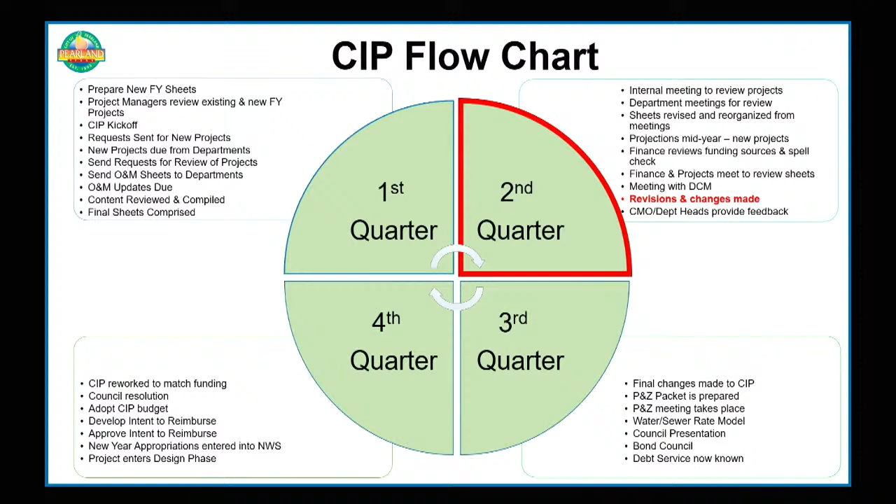The creation of the 5-year CIP is an in-depth year-long process involving every department within the city. The 2024 through 2028 CIP was finalized September 11, 2023, and the planning process for the FY25 CIP was initiated in October of 2023. We're currently in the second quarter of the CIP process, and staff is reviewing and finalizing project scopes and verifying funding options prior to presenting the proposed CIP to the Planning and Zoning Commission and ultimately to council for consideration and adoption.

In June, the CIP workshop related to the proposed FY25 budget will take place, and the CIP update series will resume in October of 2024 with updates to parks and facilities related projects.

At this time, I'll turn the presentation over to Raj Shrestha, the city engineer, for more detailed updates on drainage related projects. Thank you, Lorenzo, and good afternoon, Mayor and Council. Thank you for the opportunity to provide an update about the drainage series. The drainage section will be broken into 3 distinct categories. I will cover the first section, which will focus on drainage history, guidelines, policies, and major projects. The second part will consist of CIP drainage project status update by Lorenzo, and the third and final one will be about drainage maintenance. Eric will update the council about the status of operations and maintenance and the path forward.

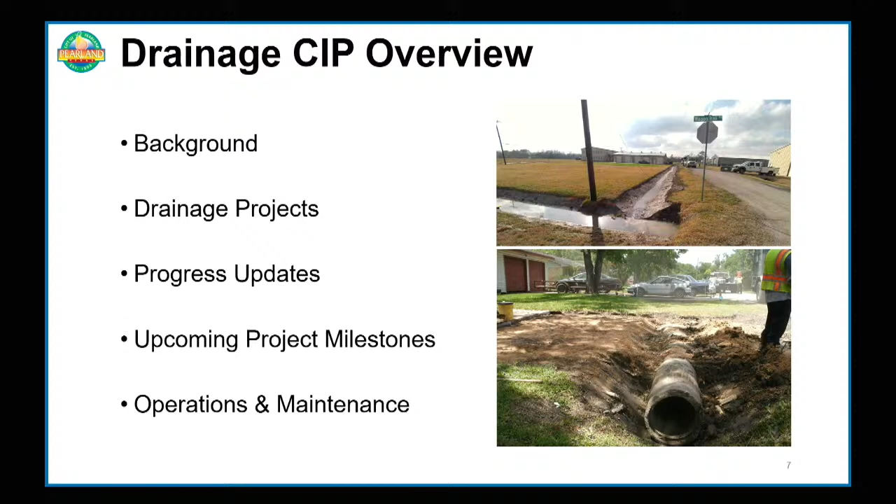Here, I'm going to talk about the history of our drainage project. As you can see, the Storm Drainage Improvement Ordinance was adopted in 1983 with no detention requirement. As time progressed, the drainage guideline evolved to add detention requirement, no downstream impact requirement, and minimum detention requirements. The most recent update requires the finished floor elevation of buildings to be higher between 500-year floodplain elevation or 1 foot above 100-year floodplain elevation, which is consistent with Harris County requirement.

On the right side, we can see the evolution of the city's Community Rating System class, called CRS. CRS is a voluntary incentive program that recognizes and encourages community floodplain management activities. As you can see in the table, in October 2024 the city will be CRS Class 5, evolving from Class 8 to Class 5 between 2005 and 2024. This CRS class improvement will make the community eligible for NFIP discount from 20% to 25%. Awesome job by engineering, and I must mention the name Shasha Bakhai, who worked diligently to improve our CRS class.

Similarly, the third table shows the history of the hazard mitigation plan. The hazard mitigation plan identifies potential hazards, assesses risk, and outlines mitigation actions to reduce property damage, injuries, and loss of life. The federal government requires it to be updated every 5 years and adopted by the City Council. An adopted HMP is a must for federal grant applications such as GLO or Texas Water Development Board or any other grant programs.

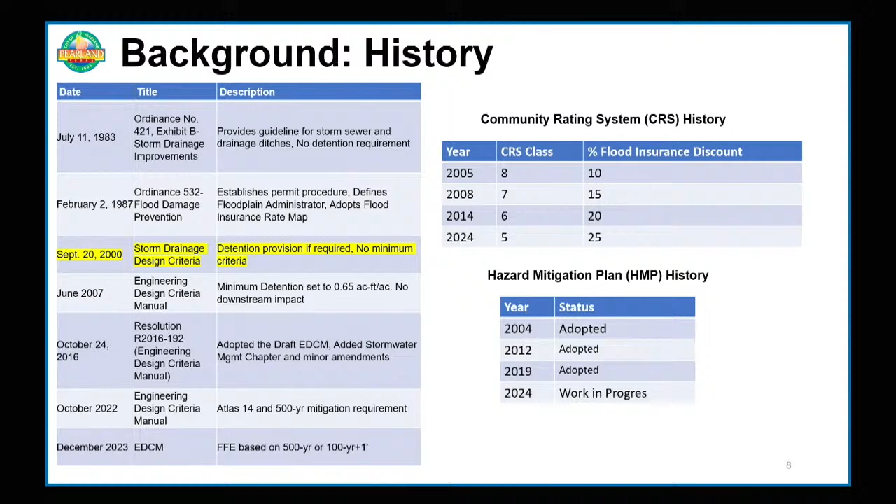Master Drainage Plan and FEMA update: Texas Water Development Board has recently awarded the FEMA FIRM update project to Halff Associates. This will update the FEMA FIRM for the Clear Creek watershed using the MAAPnext modeling concept, similar to what was used by Harris County Flood Control District.

Based on the latest communication with Halff Associates, the first draft of the hydraulic and hydrologic model will be ready by spring of 2025. We will wait for Halff Associates to finalize the calibration and validation of the H&H model, and then we can start our master drainage plan update. Halff prepared our 2019 MDP and will be updating the FEMA FIRM for Texas Water Development Board, so we are thinking we'll bring them back on board for the MDP update in 2025.

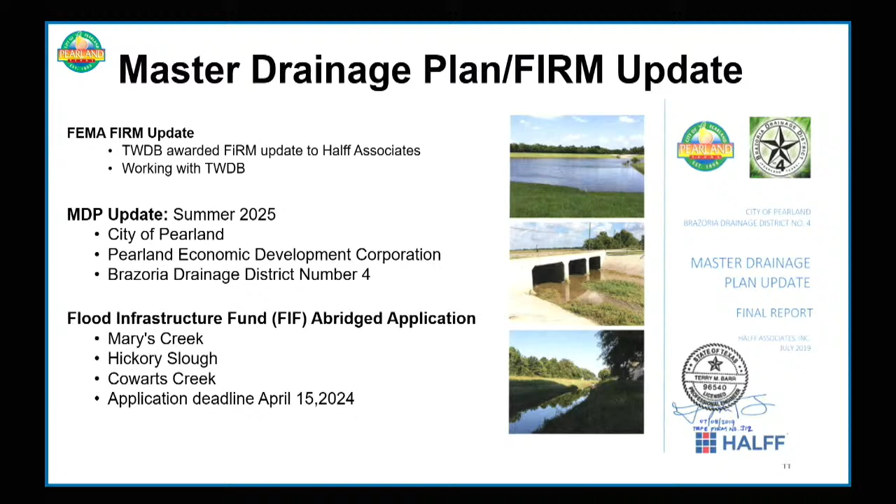The city is a member of the Clear Creek Watershed Steering Committee. The committee meets on a bi-monthly basis, in which Harris County Flood Control District provides a status update about various projects that they are involved in within the Clear Creek drainage area. This update is based on the February 13, 2024 meeting.

The major highlight includes the conditional approval by USACE in November 2023. Another highlight is the community engagement virtual meeting, scheduled for March 27, 2024 from 6:30 to 8 p.m., which I will be attending. As far as the project completion date, it is still 2032, with no change as of today.

Now I will turn it over to our director, Mr. Lorenzo Wingate.

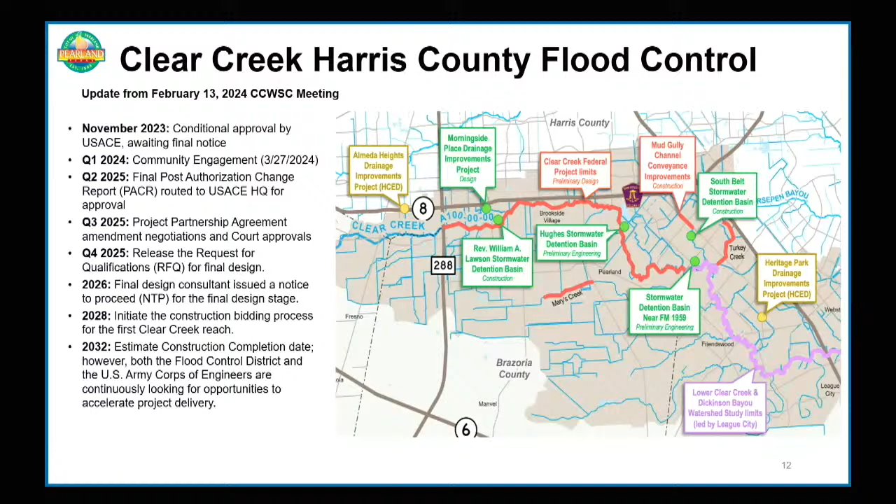In 2022, approximately 24 preliminary engineering reports were prepared for the engineering and capital improvements team to evaluate potential drainage projects around the city. The recommendations from those PERs were shared with the city's bond committee, made up of community members as well as elected officials, which led to the inclusion of most of those projects within the 2023 voter-approved bond.

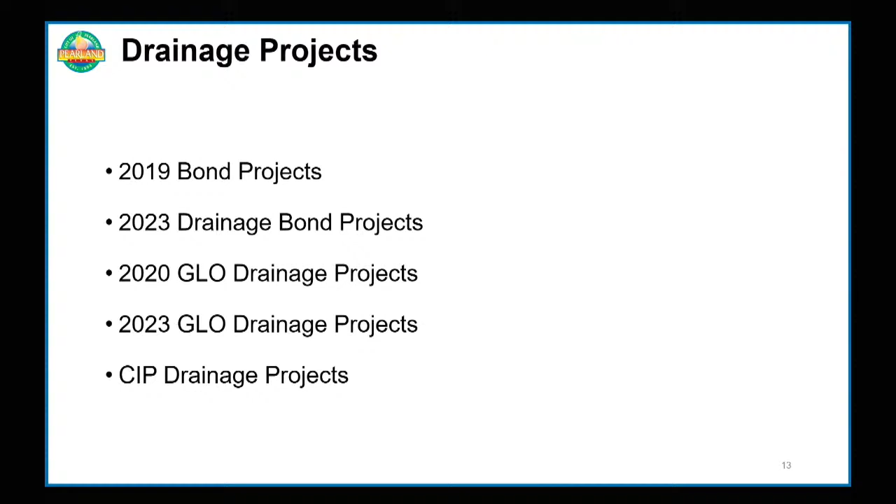The grants division also supported project budgets by securing grant funding through the General Land Office via the Community Development Block Grant Program, also known as CDBG funding.

Shown here are 14 drainage projects that were included in the 2023 bond election and their scheduled release dates. The release dates were based on project prioritization through a scoring matrix developed by the engineering division and reviewed by the bonding commission. Staff is currently negotiating professional services contracts for all 5 projects scheduled to begin in FY24, and these project scopes will include rehabilitation of existing pavement where asphalt pavement materials are within the project areas.

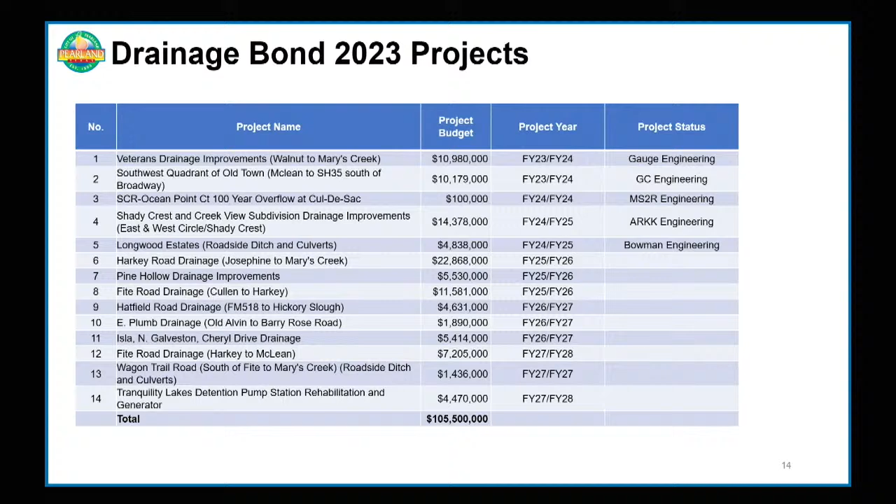There are 3 drainage projects funded through the General Land Office, or GLO, in an approximate amount of $2.3 million. These projects, noted within the Harvey Drainage Assessment Report, will improve conveyance in the area and help reduce flooding.

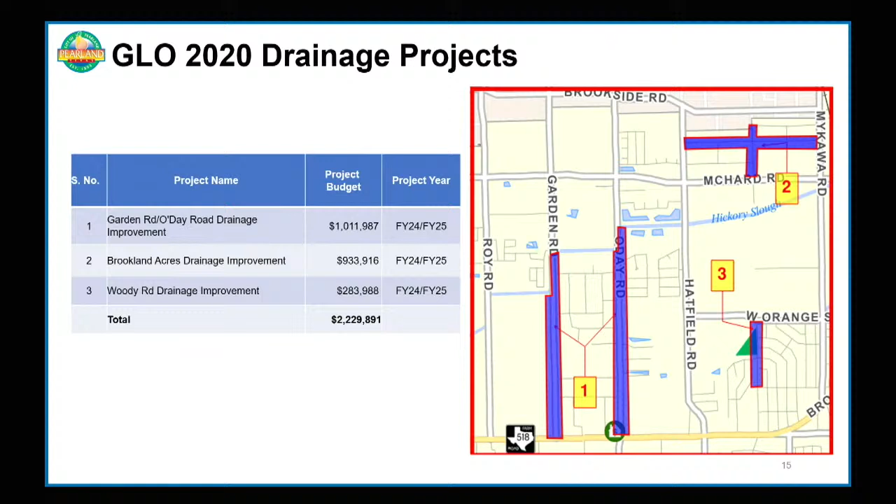Projects 1 and 2 on this list were originally considered to be included as part of the 2023 bond program. These projects will improve conveyance to mitigate flooding, and the embankment project will repair a failing embankment along Hickory Slough. Staff realized the project's location within a low to moderate income area and was able to secure Community Development Block Grant, or CDBG, funding from the General Land Office for design and construction.

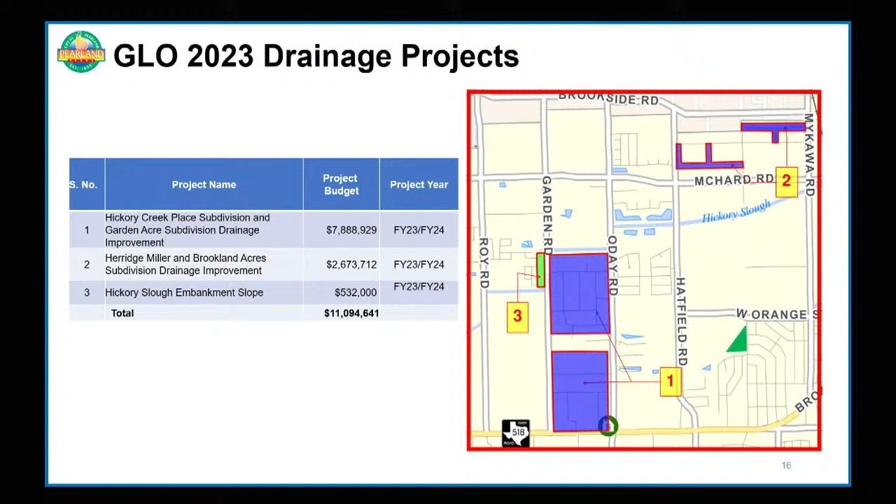These projects are combined into a single design effort and are intended to be solicited for construction as a single project.

The Hickory Slough Regional Detention Pond was constructed in coordination with BDD4. Once the McHard Road Extension Project receives final acceptance, the remaining pond improvements will be completed.

The Hickory Slough Sportsplex Detention Pond Project, which is phase 2 of that detention improvement, will be the final build out for the Hickory Slough Pond and will add 95 acre-feet of detention at the Sportsplex. It will finish out the build out of the stormwater pump station and include final pumps and a standby generator to power the lift station site in the event of power loss.

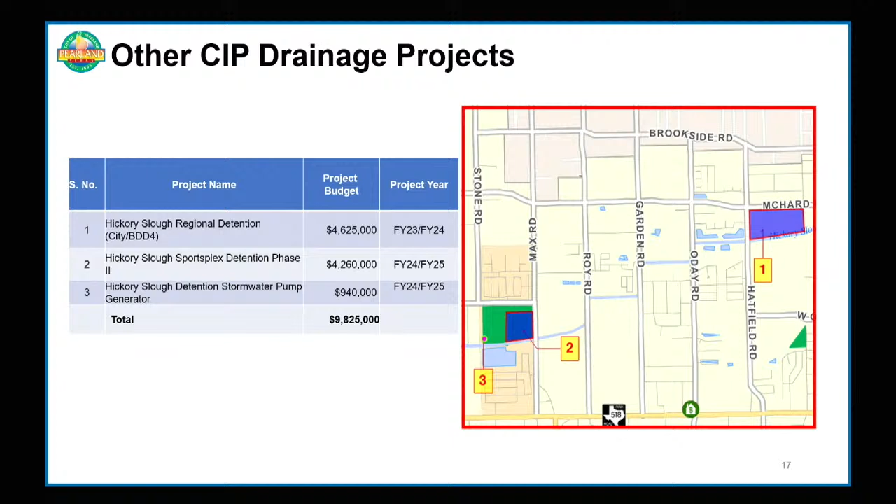The project is being designed collaboratively with the Hickory Slough Sportsplex improvements, and both projects are intended to be solicited for construction as one package.

Here's a summary of the current CIP schedule for 24 through 28, which was presented to Planning and Zoning and approved by Council on September 11, 2023, for an anticipated 5-year total of $124.5 million.

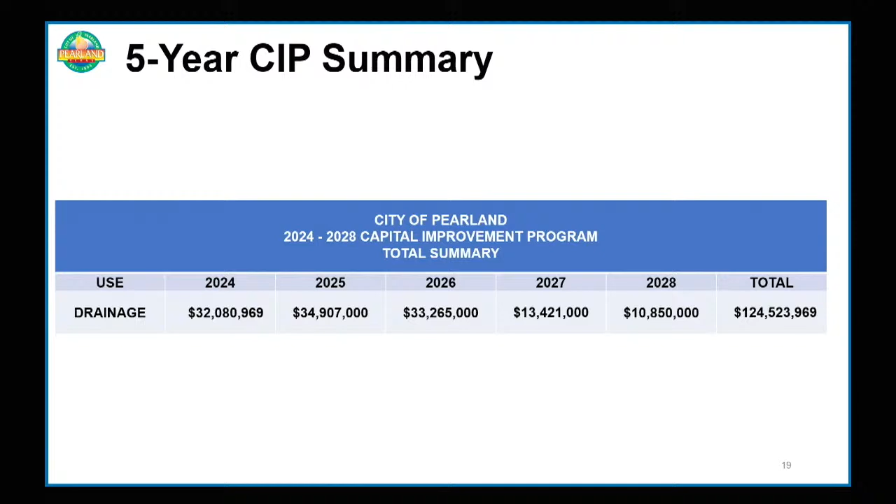At this time, I'll turn the presentation over to Eric Hammond, Assistant Director of Public Works, for more detailed updates on drainage operations. Good afternoon, Mayor and Council, thank you for the opportunity to expand on our previous operational update and touch on some of the advancements from our drainage program since we last spoke last year.

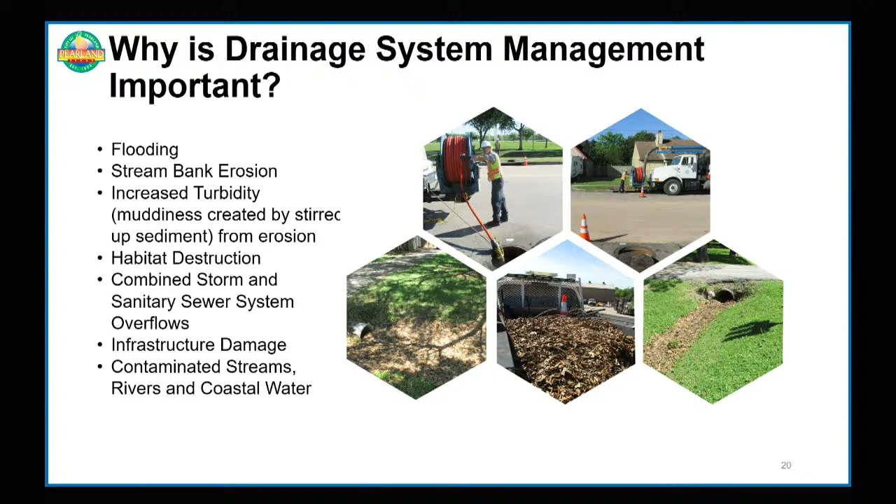As a quick reminder of why drainage maintenance is important and why we provide these services: impacted storm sewers can lead to downstream flooding, property damage, habitat loss, sanitary sewer overflows, contamination, and erosion, just to name a few. Through routine and targeted maintenance activities, coupled with our capital improvement project team, we believe we can reduce impacts of flooding within our community.

What really got us to today's drainage program: on March 2nd, 2022, while draining an elevated storage tank at City Hall for maintenance, staff observed large amounts of water ponding around the tank, not draining into our adjacent storm sewer. Upon inspection, staff found a large root obstruction impacting that sewer's ability to perform, and upon removal, the surrounding area performed as designed, reducing the potential for flooding right here in our own backyard.

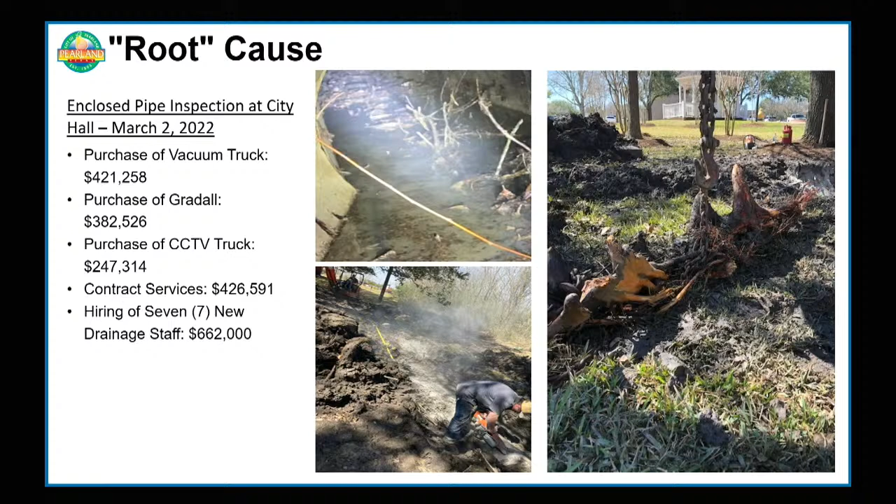That root remains in our office and serves as a reminder of what can happen should we continue to neglect drainage activities and operate on a solely reactionary-based approach.

To highlight the magnitude of the drainage system, we offer this glimpse of the 346 miles of enclosed drainage system that spans our entire community. That length of pipe would stop just short of Abilene, Texas, if we connected it end over end today.

Keep in mind there's an additional 141 miles of open ditch not represented in this image, which typically run parallel to our asphalt streets, and just under 7 miles of hybrid system consisting of an enclosed system constructed underneath a shallow swale. We also have just over 13,500 inlets that collect stormwater before it's transported to receiving streams. This inventory increases daily as development continues.

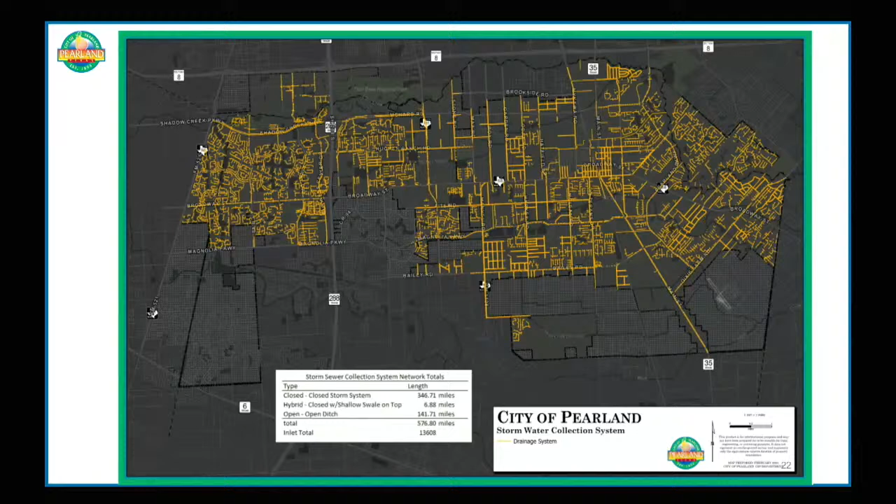In addition to the assets just highlighted, the city has an additional 110 buyout lots acquired due to past flood events, and over 300 detention facilities comprised of both private and public ownership. With the dedicated drainage team, engineering colleagues, and key stakeholders, the city is focused on a 10-year maintenance program, providing grounds maintenance services to 757 acres of drainage or buyout property, and providing all emergency response support activities related to drainage system management.

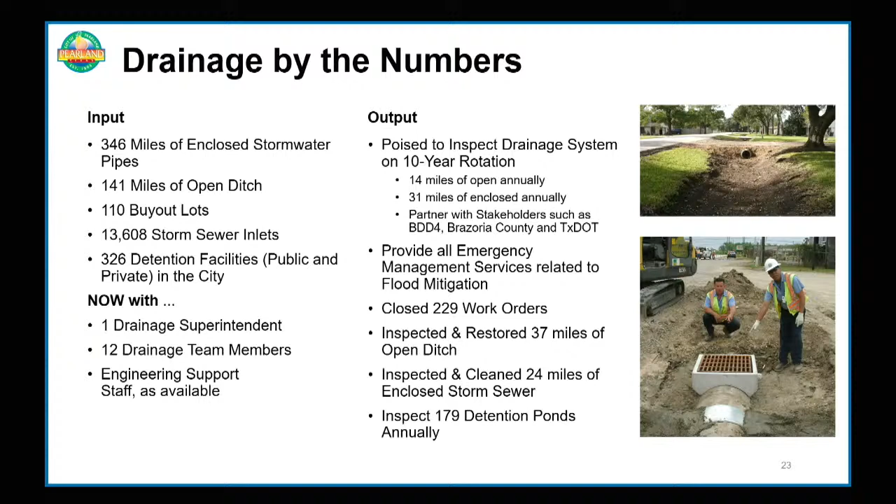Prior to FY23, we merged our right-of-way, streets, and drainage services within a single division. This merge initiated a complete streets approach to right-of-way management, and 33 employees were assigned to provide all facets of maintenance, ranging from street repair, drainage maintenance, sidewalk management, grounds maintenance, utility locates, right-of-way permitting, pavement marking, and hotshot services. However, in total, only 6 of those employees, inclusive of the service supervisor, were assigned to drainage-specific roles.

Due to reduced staffing levels, drainage and street maintenance personnel were routinely shared between services to ensure adequate staffing and response. However, in response to a desire to support drainage activities, Council supported a recommendation to increase staffing levels and critical equipment vital in providing these services.

The personnel component of that support included the phased onboarding of 7 additional drainage team members, bringing our new staff total to 13, who focus solely on the management of stormwater and stormwater infrastructure. These personnel, coupled with equipment such as Gradall, combination cleaner, and CCTV or closed circuit television truck, paved the way for the city to begin a systematic approach to drainage system management and maintenance.

As a result of the program-based approach and desire to advance systematically through the community, staff purposed to inspect, clean, and reestablish flow lines as necessary on a 10-year basis. Year one commenced in Zone A, just south of Broadway and west of Main Street. The team is now in Zone B, which mainly encompasses the area south of Magnolia and north of Bailey. Staff intend to continue advancing counterclockwise from this zone throughout the remainder of the community.

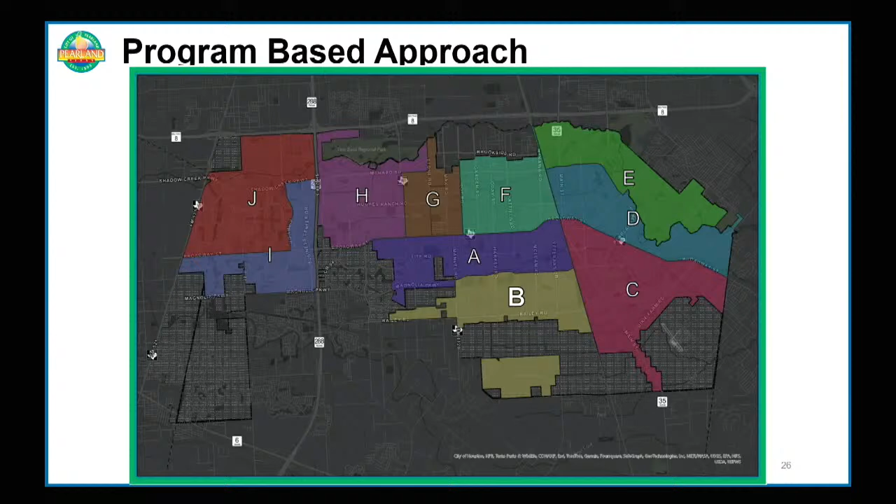To illustrate a few of the successes associated with the program thus far, the team identified and addressed the following deficiencies. The first is an enclosed storm sewer in the Woodcreek subdivision. This is an aged system and a recurring location for future CIP discussions. These photos capture a major joint separation near the outfall into Clear Creek.

A significant separation has the ability to impact the flow of water and cause backups that can lead to street and property flooding. Several feet of pipe were replaced and the outfall reconstructed. Due to the major reconstruction activities associated with this repair, this item serves as an example of the city's need to continue leveraging contractual services to supplement in-house activities.

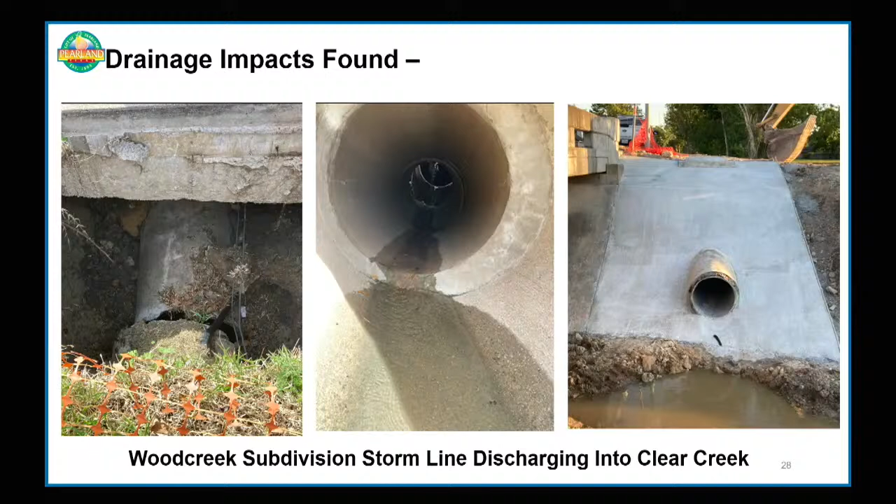Another critical deficiency identified and improved is a detention facility on Magnolia, just west of Main Street. Years of silt buildup and vegetation choked the facility's ability to receive, store, and discharge stormwater. After extensive cleaning, the pilot channels and outfalls are now free and clear of debris, which allows the water to move as designed. Not only did the silt cause maintenance challenges such as grounds maintenance activities or mowing, but it also increased the potential for pests such as mosquitoes within our community.

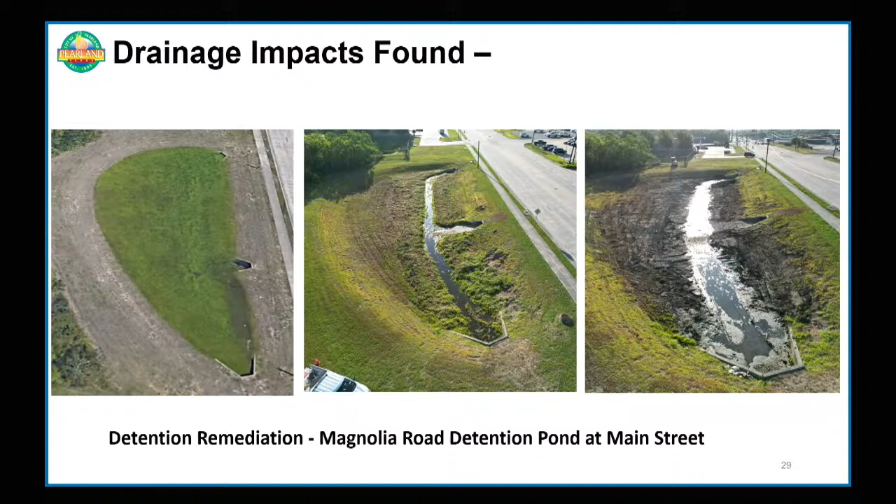As we touched on briefly, the city leverages contractual services to augment in-house staff capabilities. At an April council meeting, staff intend to renew a drainage maintenance contract with Texas Drainage to support open ditch grading activities and help ensure continued adherence with the 10-year rotation. It is also the intention of staff to present in the coming months an enclosed storm sewer contract with National Works for outsourced cleaning and inspection of the enclosed system.

The team recently conducted a pilot project with National Works for contractual cleaning and found the tandem approach to be vital in meeting service level expectations.

Contractual services aid in supplementing performance impacts caused by intermittent staffing challenges, weather delays, priority conflicts such as non-program work requests, and resource capabilities. For example, the outsourced services for open ditch cleaning employ a customized cutting head that allows for longer reach and linear pulls for ditches that may be at a greater distance from the road, and also allows turf access with this equipment because of the tracks.

So it allows them to get just off the roadway, where current city equipment is wheeled and we must remain on pavement to conduct our drainage operations. Both of these contracts were forecasted and budgeted for in the division's budget.

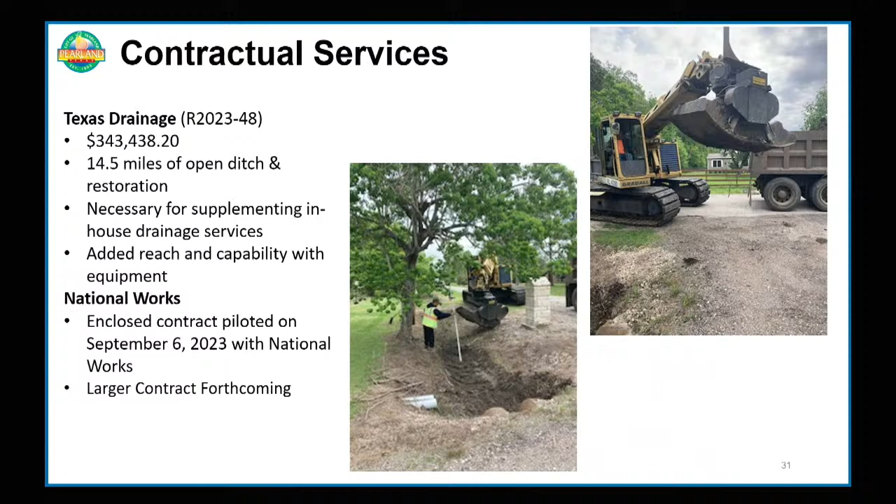As we begin to close out, we offer this glimpse of the team's current completion of drainage services within the community. Keep in mind that while we operate from a program-based approach, we concurrently manage work orders that are submitted and at times may be outside of the program zone, but addressed as prioritization requires.

To track progress, the team, in conjunction with our GIS department, developed a dashboard that provides a real-time snapshot of improvements as they are completed. This dashboard is driven from CityWorks, the department's work order management system, and as staff close out work orders, the asset status is updated in real time, providing an up-to-date view of activities throughout the community.

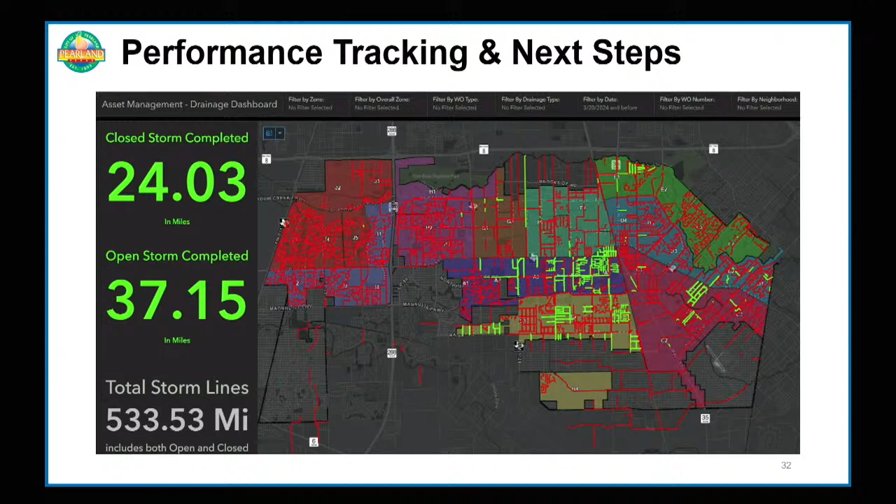Since program commencement, the team has inspected or cleaned over 24 miles of enclosed system and 37 miles of open ditches. Based on the original forecast of a 10-year plan, we're beyond the target for open drainage at 127% completion, and on track to meet our goal for enclosed system maintenance at 52% completed so far this year.

Finally, I'd like to share that in the name of ongoing improvements, the team has made a large organizational shift. As Mr. Epperson alluded to several meetings ago, staff intended to make necessary adjustments within the right-of-way division to create capacity for the division superintendent, who has managed all facets of street, sidewalk, right-of-way, and drainage maintenance activities.

That shift has occurred and provided for the development of a standalone drainage division, now led by our very own Malcolm Kennedy. Malcolm has served as the drainage supervisor for several years and was the tip of the spear in the drainage program development, as well as its ongoing success.

Malcolm is a graduate of Texas A&M University and a certified floodplain manager. Between the team and himself, we're excited for the future of the drainage program.

Most recently, the team published a YouTube video available on the city's webpage, updating the community on the drainage maintenance program, and developed a public-facing dashboard available on the city's drainage website to keep the community aware of crew locations and progress.

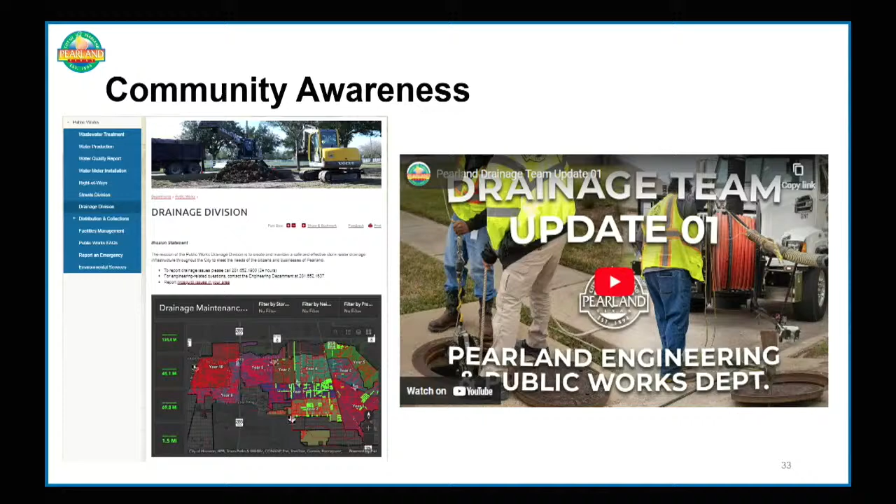So that concludes our presentation on the drainage portion of tonight's schedule. If there's any questions or comments on the drainage portion, we'd be happy to entertain those at this point. All right, we'll open up for any questions that someone might have.

Jimmy? So in the drainage package that we put together, I saw the list and everything, and I'm looking forward to those. But in those meetings of the drainage bond committee, you guys had a 2D model that showed if it started raining and kept raining, which areas would flood first. I'm not sure all of us have seen that. I have, but I would love to actually see that again. So I don't know if you guys can email that out or present it to us in some form or fashion.

And then my question on that also is, on that 2D model, is there a way, with the improvements that we're going to make with the bond package, to adjust that 2D model to show the actual impact that we are making on the drainage of the city?

Thank you for the question. I'm not sure which one was discussed during that meeting. I remember one for the Longwood area where we did that project, and that was a 2D model.

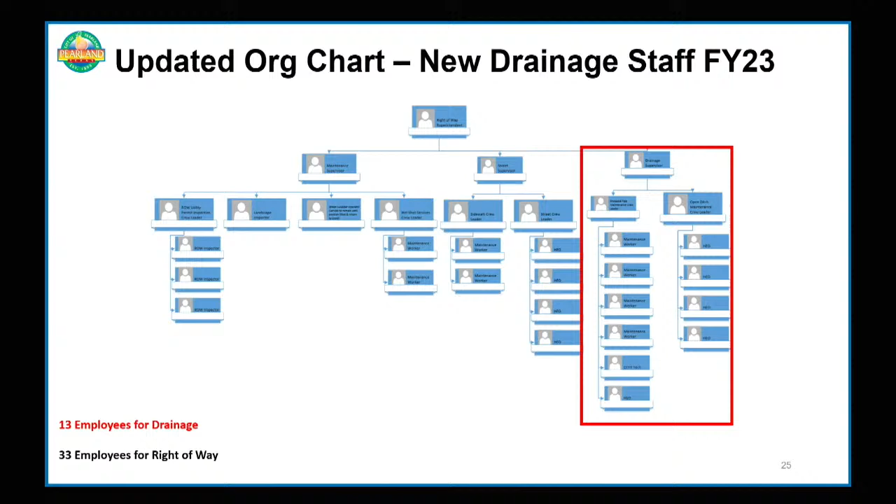Yes sir, Mayor. We are working to collect that information, and very soon it'll be visible on our internal dashboard, where we have all of the data saved that shows all the conflicts, issues, or obstacles we've overcome, so that we can navigate through those or prevent them in the future. We are working on collecting those now, especially through the use of our CCTV equipment.

Perfect. I see that as a future talk of the town subject, where we educate the public on here's the program we stood up, here's what we're now seeing, here's some of the data we're collecting, here's what we're seeing in that storm pipe and the reason we're doing it, so when the storm comes, we're now ready for it in those areas. So thank you for that.

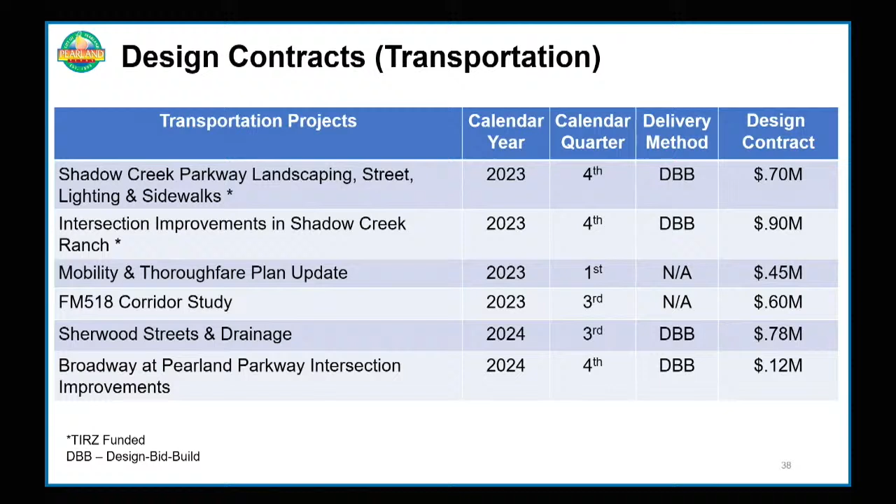Two major projects that were completed in 2023 include the Shadow Creek Ranch sidewalk extensions and the extension of McHard Road from Mykawa to Cullen. McHard Road, opening in April of 2023, provides another east-west corridor intended to lessen the traffic volumes on FM 518.

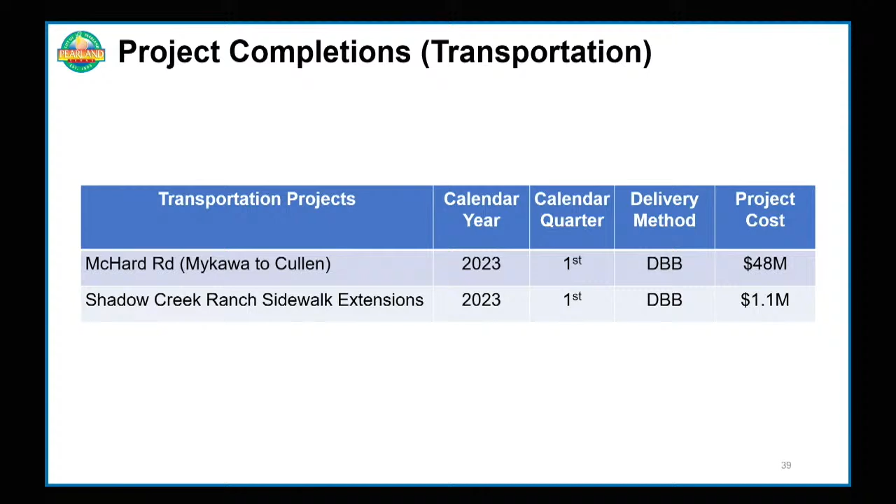The McHard Road project was awarded funding through TxDOT's Local Government Projects Procedures Qualification Program, also known as LGPP, which offers an 80-20 cost share split with TxDOT paying 80 and the city paying 20. The McHard Road extension will also be more important in the coming years as TxDOT progresses with the FM 518 expansion project. The west section of FM 518 expansion, from Old Chocolate Bayou to 288, is projected to begin construction in 2025.

The Safe Routes to School project is a federally funded project and provides safe access to local elementary schools.

The Bailey Road expansion is a 2019 bond project, currently in construction, which will provide 2 dedicated eastbound travel lanes between Highway 35 and Veterans. The project is expected to be completed by April 6th of 2026, or about 861 calendar days.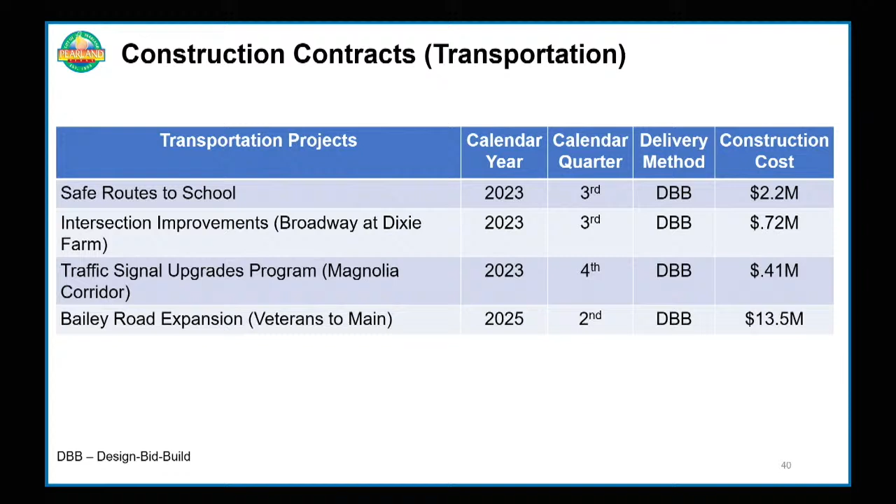Several traffic signal upgrade projects are being managed by the traffic division, currently ongoing to replace outdated equipment, including cabinets, detection systems, and pan and tilt cameras along Magnolia and 29 other intersections.

Projects that did not receive HGAC funding will be candidates for future bond programs. With that, I'll turn the presentation over to Yossi Ramirez, the city's traffic engineer, to provide a traffic operations update.

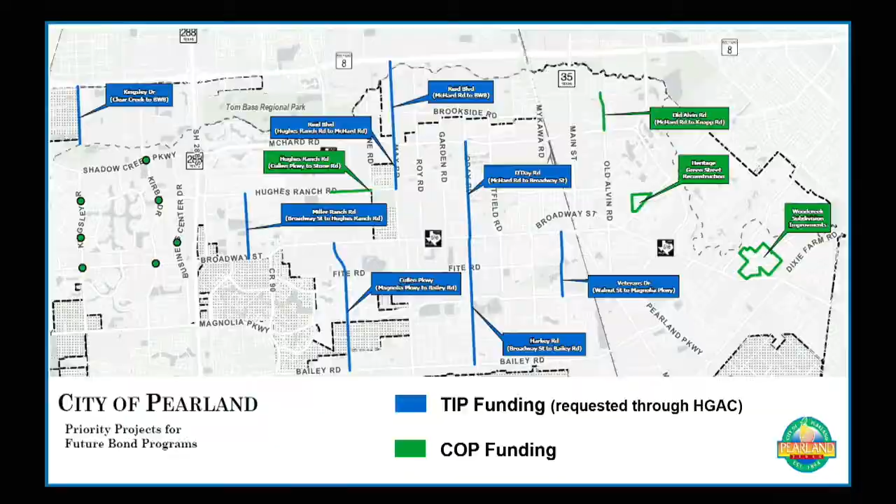The City of Pearland Traffic Operations oversees the city's transportation system, which includes traffic signals, school zones, communication system components, city facilities, and other elements of the city's infrastructure. The daily maintenance of traffic operations includes troubleshooting several internal components in the traffic signal cabinets, field hardware, and school zone flashers, as well as repairing damaged streetlights and converting them to LED fixtures.

We recently inherited the daily maintenance of street signs, which includes installing and repairing signs along the city streets. In addition to our daily maintenance, we have several internal projects.

Short-term projects include upgrading the school zone flashers program to new timers, which we can now program from our traffic management center. Another short-term project is the Opticom emergency vehicle preemption, which has allowed us to decrease response times and improve safety for emergency responders.

41 fire vehicles are now outfitted with Opticom equipment, and we are looking to add 15 police vehicles by the end of April as a trial for police. 82 intersections are connected to the preemption system, and the remaining 28 intersections are waiting for fiber connectivity.

For mid-term projects, this includes installing flashing yellow arrows at several intersections, overseeing the rebuild of 5 span wire intersections, and removing and replacing outdated traffic signal equipment such as traffic signal cabinets and detection systems.

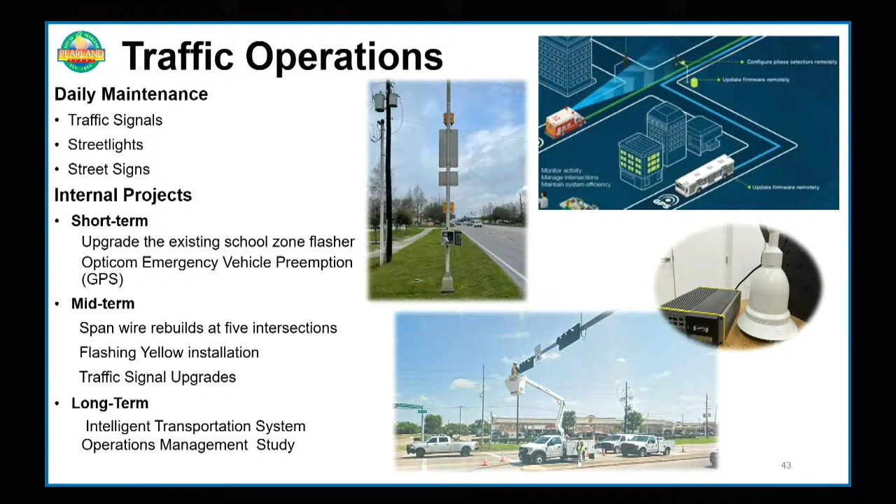We also have 3 projects in partnership with the Houston-Galveston Area Council. As you can see, we have the Pearland Transit Needs Assessment Plan, the Pearland Mobility Study, and the FM 518 Corridor Study. The Pearland Transit Needs Assessment Plan is 100% funded by HGAC.

The study aims to determine and assess the needs for public transportation or transit in the Pearland community, and to provide recommendations for what types of transit services, if any, may be appropriate for the community to consider in the future. Phase 2 of the public meetings occurred from March 19 to the 21st, and the final report is near completion. It is expected in late spring 2024.

The Pearland Mobility Study and the FM 518 Corridor Study are 90% funded by HGAC and 10% from the city. The Pearland Mobility Study is a 12-month study that will result in a mobility plan that includes an action plan, a traffic management plan, and an update to the Pearland Thoroughfare Plan. The study will also investigate safety, connectivity, network efficiency, and the integration of multimodal facilities.

The FM 518 Corridor Study is an 18-month study evaluating the FM 518 corridor from McLean Road to Edgewood Drive. The study will evaluate a one-way pair analysis at FM 518 at McLean and Walnut, providing a one-way direction on FM 518 and Walnut. This analysis will be needed for the Old Town study.

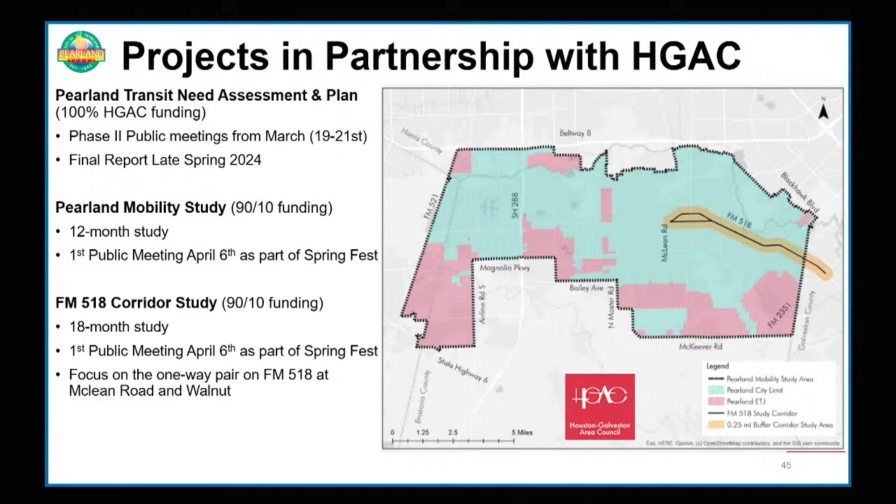Both studies will include short, medium, and long-term recommendations, and such recommendations could include road expansions or intersection improvements that will assist in developing capital improvement projects. The first public meeting for both studies will take place on April 6th as part of the Spring Fest.

The Traffic Division inherited the maintenance of street signs and added 3 staff members in October of last year. The Traffic Division now consists of 8 employees: 3 are responsible for maintaining 110 traffic signals and 3 responsible for all signage on city-owned streets. With a projected increase in infrastructure, sign maintenance, and fiber connectivity within our signals, we project the need for additional staff members in a couple of years, which will be based on our Intelligent Transportation System Operations Management Study.

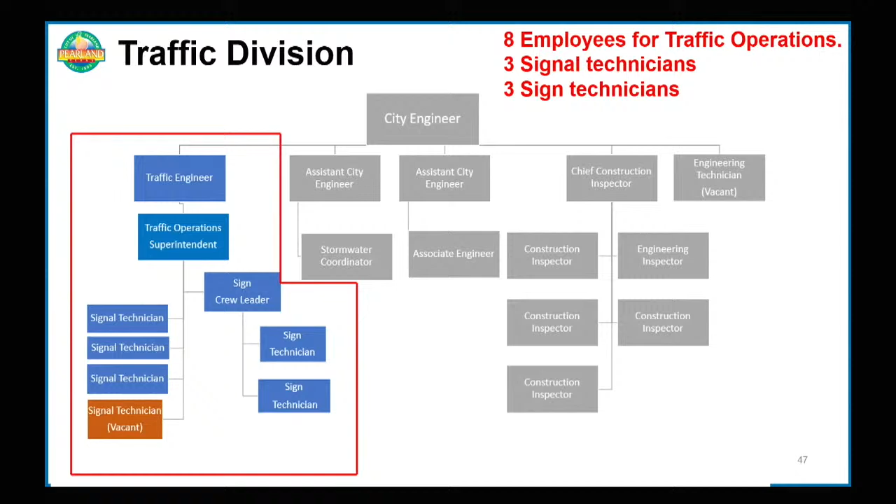The Traffic Division also manages the Traffic Calming Committee, which involves city staff from the Engineering and Public Works Department, Police Department, Fire Department, and a consultant professional traffic engineer. The traffic policy can be found in Ordinance Number 1301-1 and is based on the Texas Manual of Uniform Traffic Control Devices, or TMUTCD. The meetings are held monthly, and typical requests include cut-through traffic, speeding, requests for stop signs, speed bumps, and signal warrants.

The complete analysis for these requests takes about 45 days, depending on the type of request. One frequent request is to lower the speed limit on residential streets. According to state law, the speed limit on residential streets is 30 miles per hour, whether a sign is posted or not. The city does not lower the speed limit on individual residential streets. Instead, we maintain consistent residential speed limits across the city that are in line with state law.

The Traffic Calming Committee addresses requests on a case-by-case basis, which is how traffic issues have historically been addressed in this area. However, the committee can recommend a study based on the number of requests, the frequency, and the concentration of the traffic issue in the area if it's higher than others.

The Traffic Calming Committee has recommended several studies in the past year, including the traffic condition assessment on Hughes Road, Riverstone Falls, and Alexander Ridge, as well as the traffic signal installation at Dixie Farm at Toll Oak Drive, Hastings Friendswood Road, and the Sleepy Hollow cut-through traffic evaluation study. Depending on the recommendations and funding available, the studies may become short-term, mid-term, or long-term projects for the department.

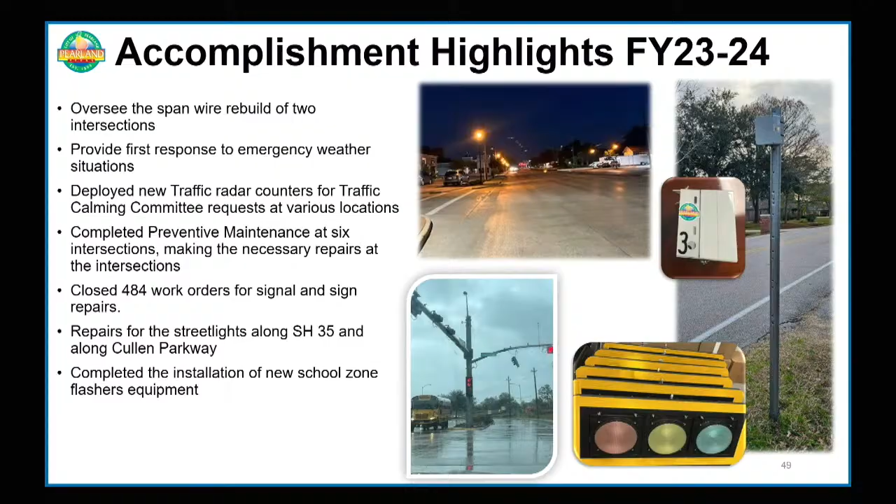Thank you, Yossi. In 2014, the Infrastructure Management Services, or IMS, evaluated the city's roadway network and provided a condition assessment on all of the city's asphalt and concrete streets. IMS reassessed the city's roadway network in 2023, and Dr. Sadaf Khazravafar from IMS is here to discuss the 2023 condition assessment.

Thank you, Lorenzo. Good afternoon, Mayor Cole and council members. IMS has had the pleasure to collaborate with Pearland on several roadway condition assessment projects since 2014. Today I'll be providing a brief overview of our observations regarding network level pavement conditions in Pearland.

As outlined in the agenda, I'll begin by explaining the pavement management process and the methodology we followed for pavement condition surveys. Then I'll showcase example photos of pavements in various conditions, and get into the results, presenting our findings regarding the current state of the network. In addition to pavement data, we also collected other assets, so I'll conclude by providing an overview of those assets collected.

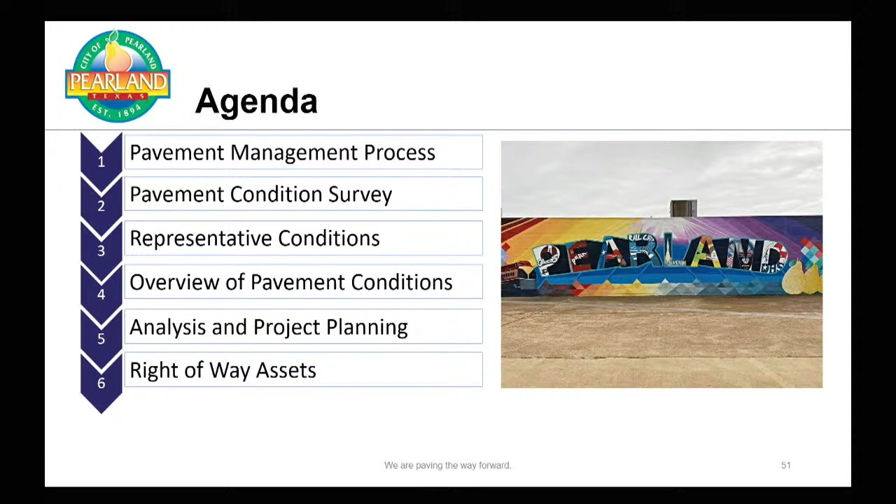Pavement management is an iterative process that allows for data-driven maintenance of roadway assets. Through this process, we start by reviewing the city's current objectives, goals, policies, and budget. Then we follow with a thorough assessment of pavement conditions to determine the current conditions, and utilize this data to forecast future conditions and develop a maintenance and rehabilitation plan. Finally, the city conducts the planned project, and this cycle repeats. The major goal of having a system in place is to have that feedback loop where we can always use data to update our objectives, policies, and budgets.

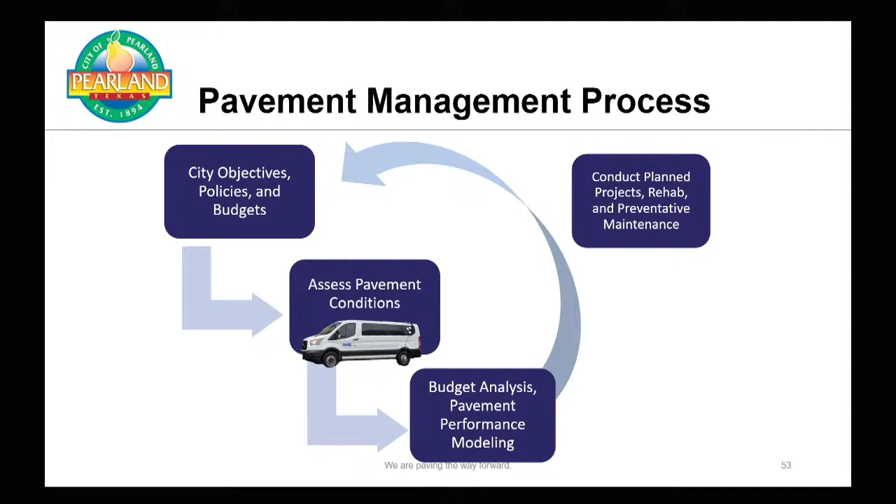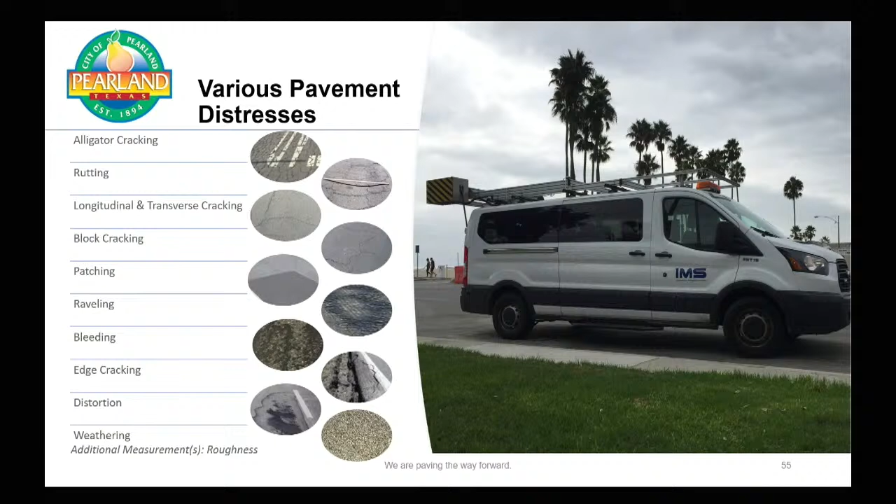We follow a semi-automated process where we first analyze images using image processing and AI, followed by a manual review of the data.

After we identify all of these cracks, we manually review them, and then we classify them into different distress categories.

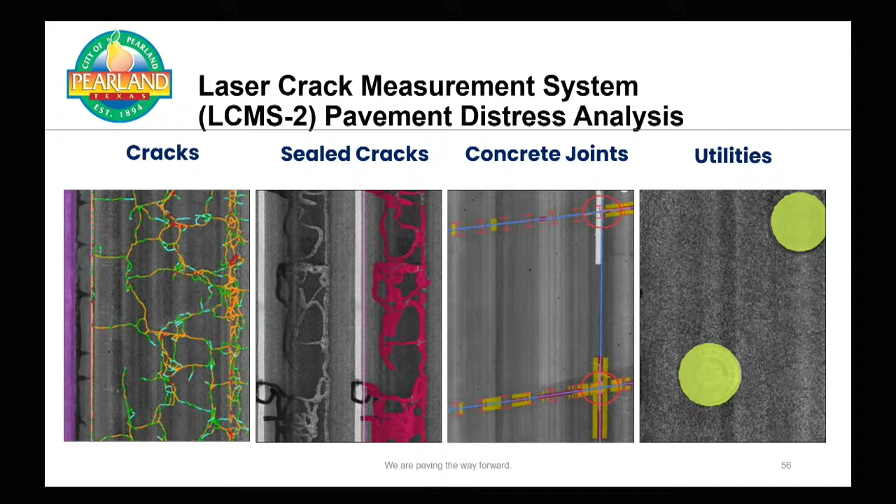Then we follow industry standards, specifically ASTM D6433, a widely used standard to analyze the data. We analyze distress types, severities, and quantities to determine a score.

We call it the Surface Distress Index. This SDI is a score from 0 to 100, and it allows us to have an idea of the surface distress conditions.

Similarly, we analyze the road's longitudinal profile following ASTM E1926, and that allows us to determine another index called the International Roughness Index, giving us a measure of ride quality.

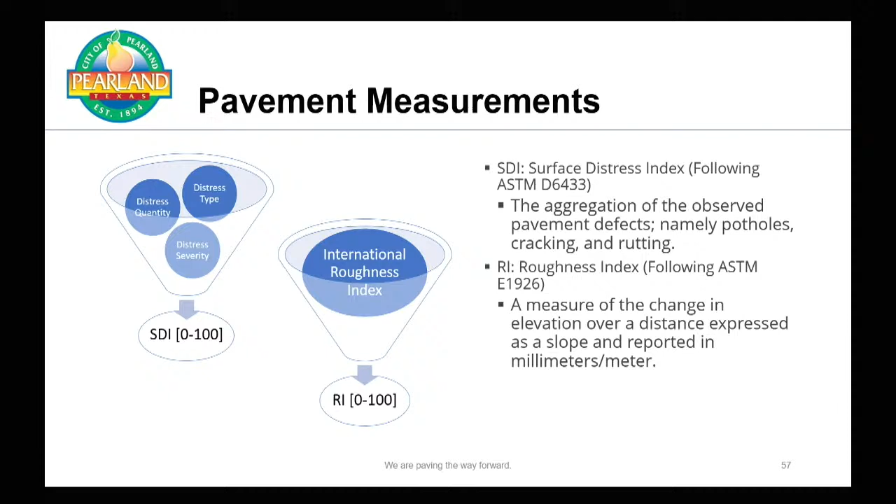Then we combine and aggregate those two indices into one combo index. We call it PCI, or the Pavement Condition Index.

This PCI value provides an indication of the surface condition and the structural integrity of the pavement, and we can further divide that 0 to 100 score into various categories, using descriptive terms such as very poor, poor, marginal, fair, good, very good, and excellent.

When pavements are at a PCI of 40 or below, they're considered poor or very poor, and they've already lost their window of opportunity for maintenance and rehabilitation. Those are the ones that generate most of the complaints, but unfortunately they've also lost the window of opportunity for any mill and overlay project or preventive maintenance work.

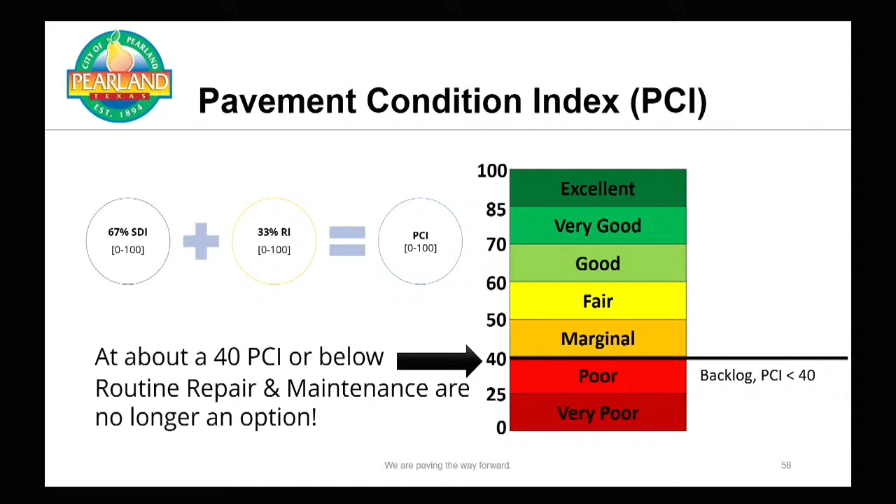Now I'll be presenting some images showcasing city streets that fall into these various categories. The first example is a picture of Broadway Bend. This pavement is in very good condition with a PCI of 75.

The only distresses on this pavement were minor scaling or fine cracks—pretty much hairline cracks that only extend through the upper surface of the concrete, so you just need to do routine maintenance on a pavement like this.

Next, I have a segment of McHard Road in good condition. The predominant distress in this segment is linear cracks. These cracks divide the slab into 2 or 3 pieces, usually caused by a combination of repeated traffic and temperature changes in the pavement through day and night and different seasons.

Next example is from Spectrum Boulevard, from Riley Road to Hooper Road. This is in the marginal category. The predominant distress is longitudinal and transverse cracking, alligator cracking. It has some rutting under the wheel path, permanent deformation under the wheel path.

This pavement is at the end of its opportunity for a mill and overlay project. If we delay or defer this pavement any longer, it becomes a reconstruction need.

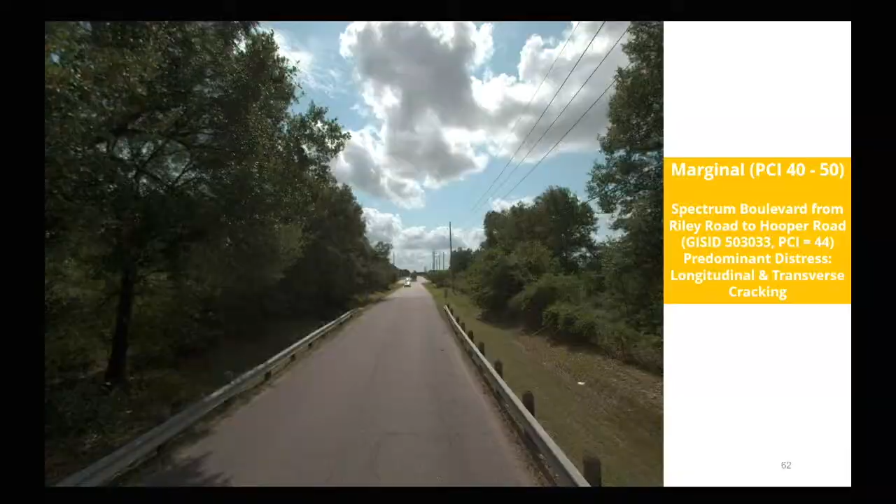Next, I have an example of what happens if you defer that maintenance. This segment is on South Texas Avenue from West Walnut Street to West Pierce Street. It is in poor condition with a PCI of 35.

There are just so many different types of distresses on this pavement. It's already past its window of opportunity for anything—you basically need to dig out and do a full reconstruction.

Now that we've looked at several examples of pavements in different conditions, let's dive into the current state of pavements in Pearland. Pearland is a mid-sized city with a population of about 126,000 and about 449 centerline miles of roads. At the time of the survey, done in July of 2023, the average PCI was 74.

About 3.6% of the pavements are in poor or very poor condition, that backlog category I'm talking about. This is a very good average PCI.

When we compare it to national averages for your reference, among our clients the average is about 63 nationally and about 68 in Texas.

But when we compare Pearland to Pearland back in 2014, we can see a decline. Back in 2014, the average PCI in Pearland was 76, so now we are seeing a 2 point decline in the average conditions.

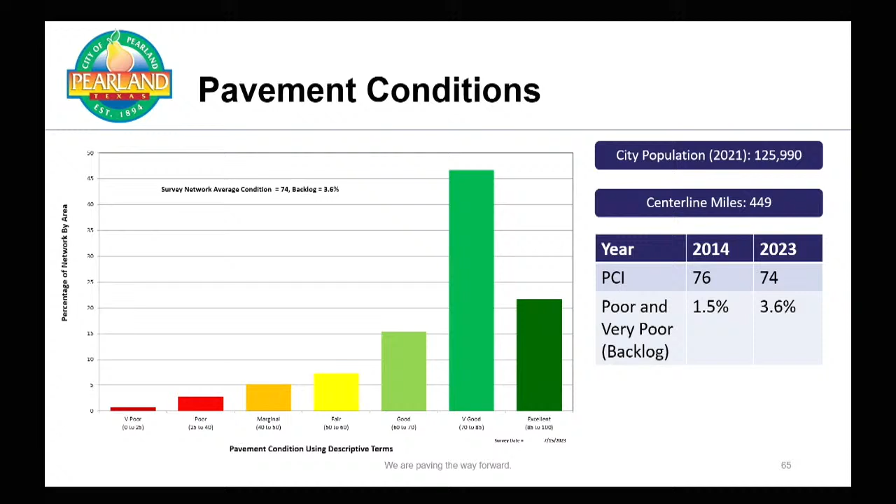Next, I am looking at the distribution of pavement conditions into two different categories, the concrete and the asphalt network.

All right, as mentioned earlier, with the van we also captured... Before you go on, can you go back to the last slide? Was this the same exact, you said you compared 2014 and 2023. Did you drive the exact same roads?

There could be minor differences because the network could grow. So basically, we drove your entire network in 2014 and your entire network in 2023. I would imagine the network in 2023 could be bigger, yeah, but on average, when we look at the average conditions, yeah.

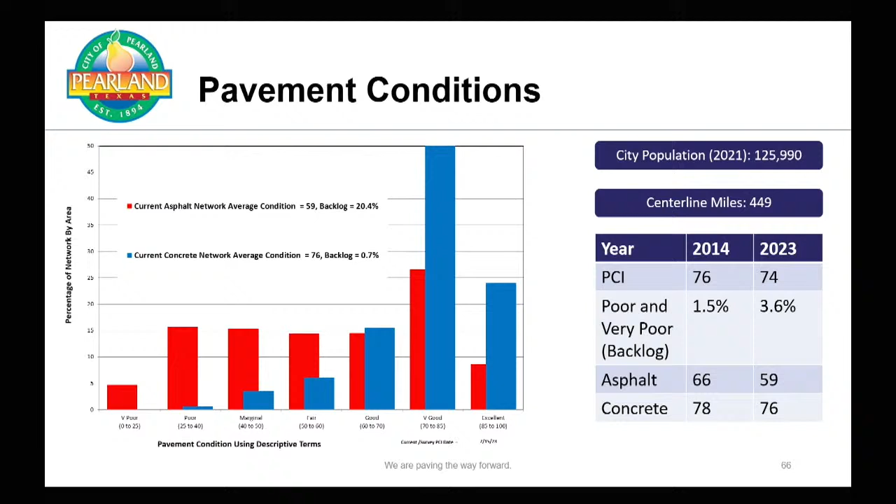Yes, so with the van we also captured 360 images with a ladybug camera. This allowed us to extract information regarding the location and key features of various right-of-way assets, including signs and supports, sidewalks, obstructions on the sidewalks, ramps, as well as pavement markings and stripings. This approach offered a broad overview of the current state of assets within the city, and it laid the groundwork for a more comprehensive program should the council decide to pursue it.

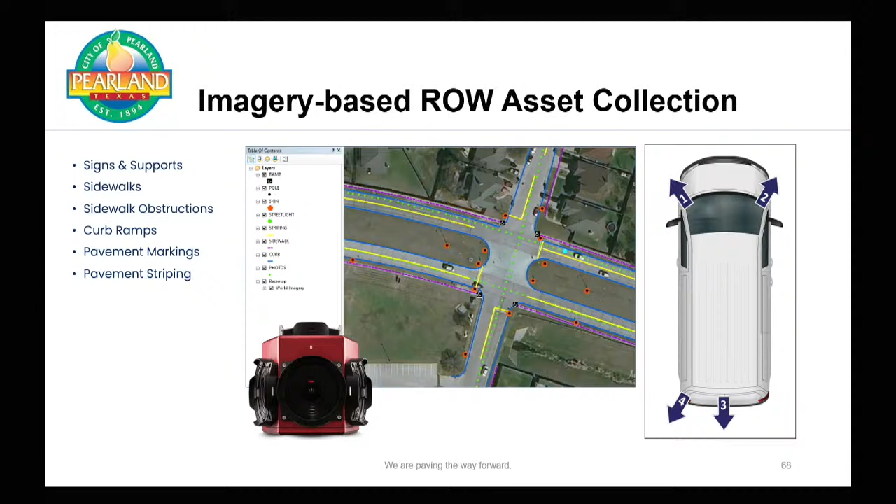This concludes my presentation. Thank you for listening, and I'll now hand the presentation back to Eric.

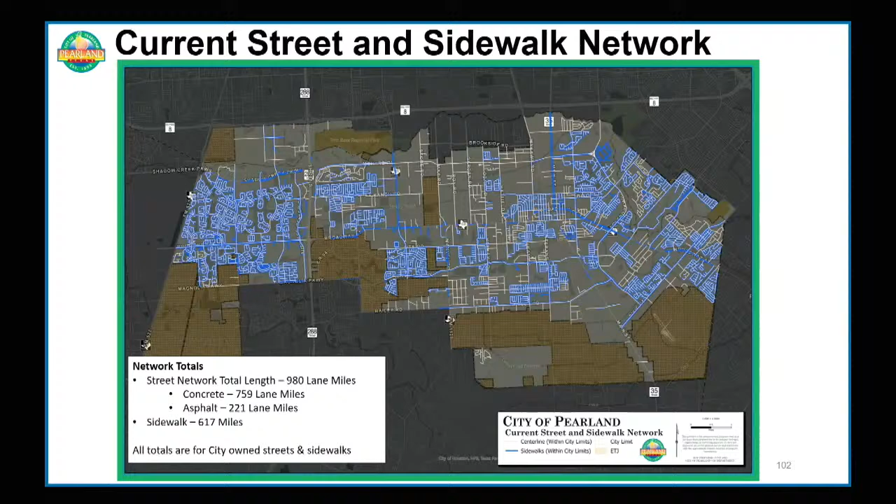Currently, there are 9 team members assigned and budgeted to maintain this entire street and sidewalk network, one of which is a dedicated supervisor who manages daily operations. 3 team members are dedicated to the 617 miles of sidewalk, and the remaining 5 team members are dedicated to maintaining the 980 miles of roadway.

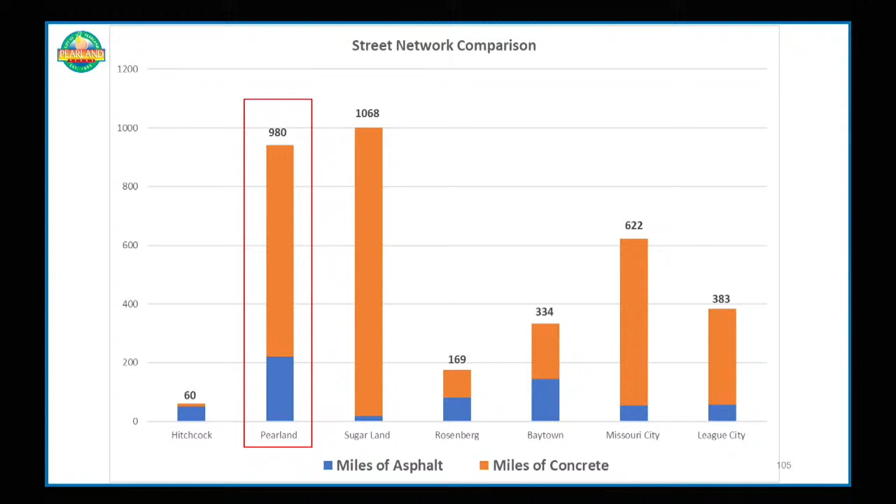Again, while we have not identified a national average, we hope to paint a picture of what a commuter may see or feel, as Sadaf said, can you hold your coffee in your cup as you travel through some of these neighboring community streets, and the human investment it took for those communities to reach those service levels.

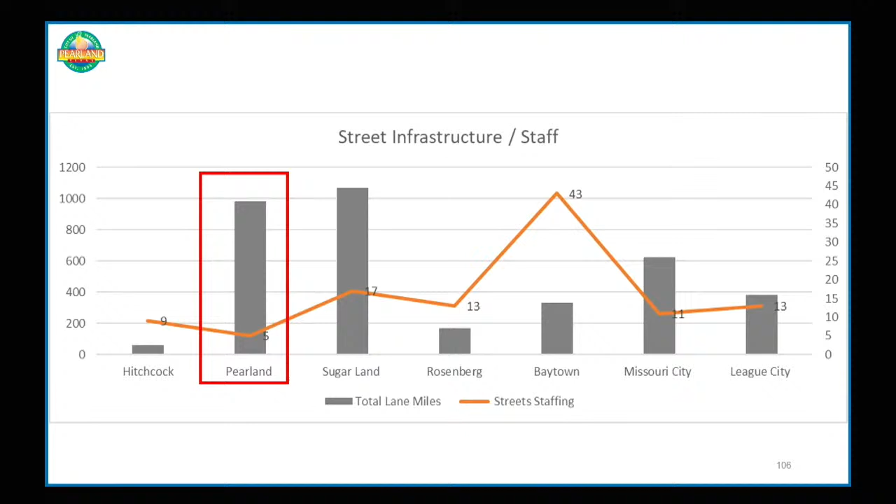Based on the 2023 survey, the Infrastructure Management System suggested a budget of $5.97 million annually is necessary over the next 5 years to maintain a steady state PCI of 74 or 75, based on infrastructure and industry construction activity pricing. Deviation from this estimated annual budget is forecasted to impact our PCI over the next 5 years.

This remains our initial plan forward, but should additional budget dollars be made available, we offer the following slides for increased improvements.

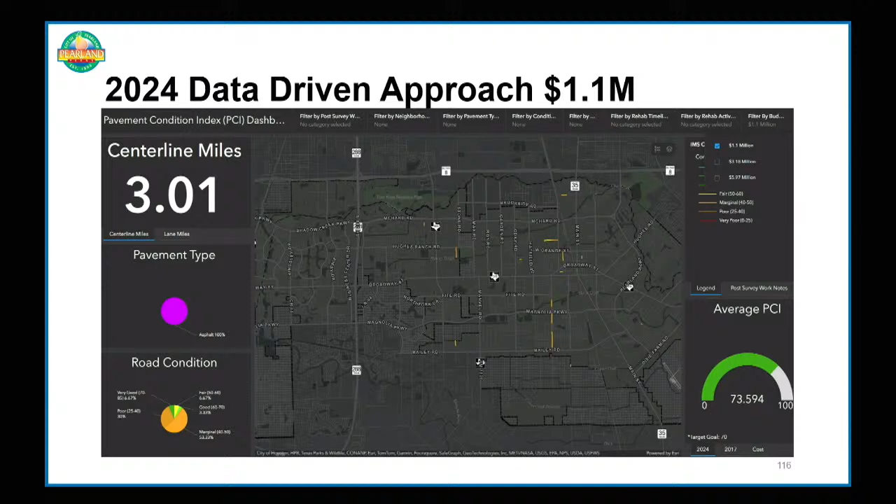This budget would improve an additional 3 miles of roadway within our community, and could be scaled as budget dollars allow. Unfortunately, recurring funding at this level is forecasted to deteriorate our overall PCI to a score of 69 in the next 5 years.

Should additional budget dollars be available, such as a little over $3 million, the community could realize an estimated 8.5 miles of additional improvement. All roads planned in this data-driven approach are asphalt streets, but again, this budget falls below the recommended steady-state budget and is forecasted to result in a decline of our PCI to 71 over the next 5 years if this was the target budget.

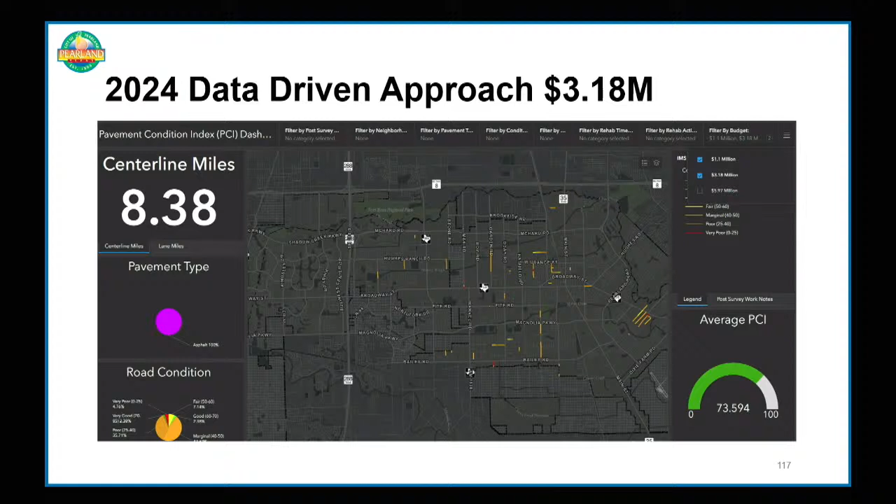Finally, if the recommended $5.97 million was infused into the maintenance program, the community could realize just under 15 miles of additional roadway improvements in 2024. This funding level begins to incorporate a mix of concrete and asphalt improvements, and is the target amount recommended by IMS annually over the next 5 years to maintain that steady state PCI.

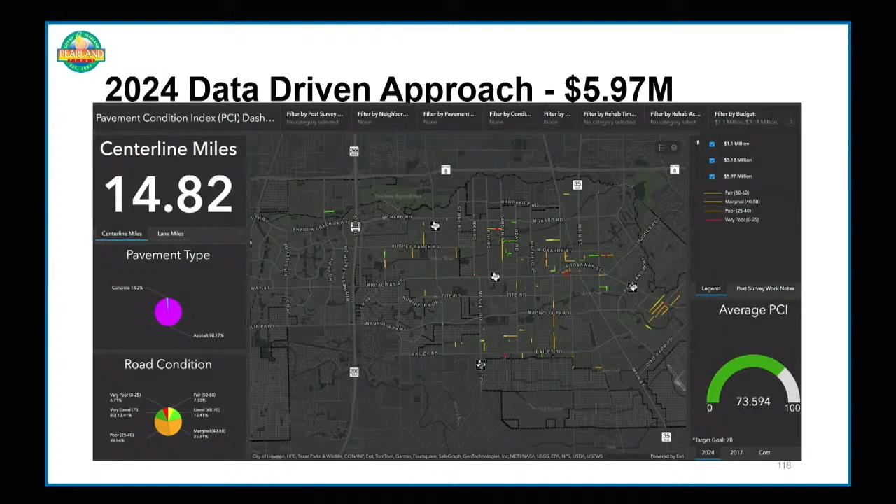For some clarity on the roads listed in each budget option and the corresponding limits, this slide depicts those locations that could be improved based on additional funding in FY24. Please note that this is not a comprehensive list. As you may have noted in the previous slides, there are multiple short segments planned for improvement based on the data-driven approach. Because those segments could range from 50 to 500 feet in length, we offer this image for a high-level view of the major areas that could be improved.

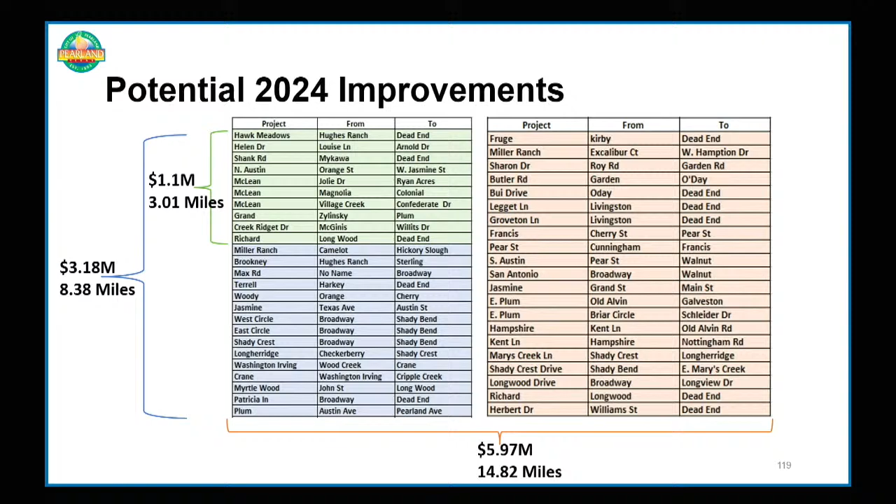As previously mentioned, the 2014 IMS data indicated that an average of $4 million should be invested into the pavement network annually for the following 5 years to maintain the steady state PCI at that time. This table illustrates the annual budget provided for street maintenance for the previous 4 years. As you can see, competing priorities have impacted the available budget dollars and subsequent work.

Regarding asphalt street impact alone, the 2013 survey indicated an overall asphalt PCI of 66, which has deteriorated by 11% due to deferred maintenance in the past 10 years. Should this trend continue, we can expect further decline, reaching the bottom of the fair category or below by the next survey.

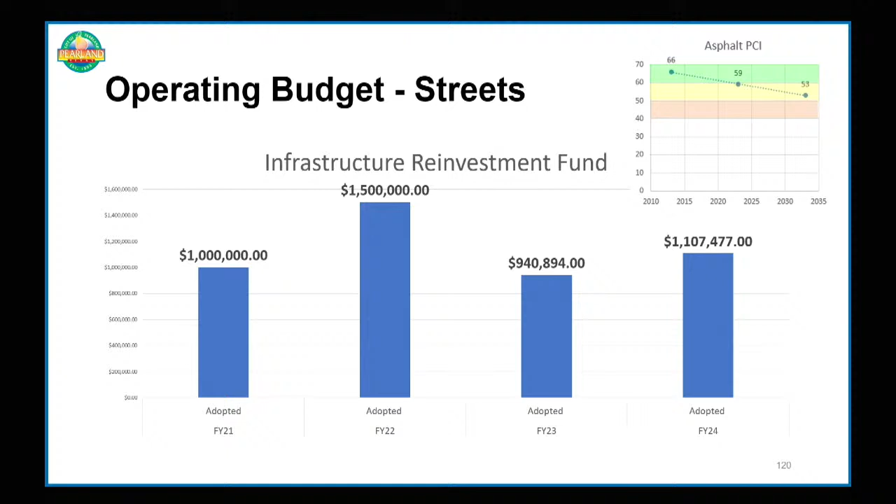One additional improvement the team has developed is a program-based approach to pothole maintenance, mirroring the success of several other operational programs. Moving forward, staff intend to work within one of 5 dedicated zones and rotate daily. This will allow staff to systematically address issues in a specific location of the community and reduce travel time between project sites. To drive activities within these zones, staff have developed a pothole priority matrix that determines the severity and risk associated with each pothole, as well as the need to mitigate.

This plan allows staff to address issues based on a priority approach within approximately 10 business days for isolated issues. Although there are several requests in the queue, it's believed that with refinement of this plan and policy over the coming months, the program-based approach will allow for swifter resolution and improved communication with our residents.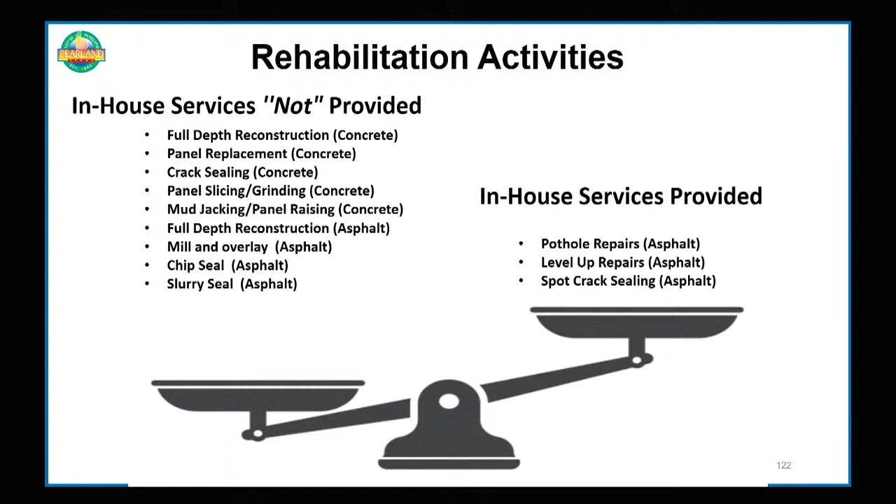As we close out, we'd like to note the intent for aligning the streets team staffing with the provision of those best management services. As shared, we intend to continue leveraging contractual services as necessary, but in addition to funding, additional human capital is necessary.

The team has developed a 4-year plan for right-sizing the team, with year 1 intending to recommend 5 additional utility maintenance workers who will allow the creation of a hotshot asphalt street maintenance team. This crew will report to an existing crew leader and allow for a rapid deployment pothole patching service, routine crack sealing service, and curb repairs.

This team would be expanded upon in FY26 with an intent to fund a concrete repair crew, which currently has no dedicated services and minimal contract dollars, although over 80% of our network is concrete infrastructure. Moving into FY27, the team would again recommend expanding into a second asphalt crew to allow division of our community into 2 separate districts, before concluding in FY28 with a second concrete crew, allowing division of our community into similar districts for our concrete services.

One important note is that by FY28, near the conclusion of our sidewalk bond program, after some additional monitoring, staff may be able to leverage the recommended concrete crews and equipment to take on in-house sidewalk maintenance activities. With that, we look forward to mirroring the success of our drainage program, as well as council support where possible in the coming budget year.

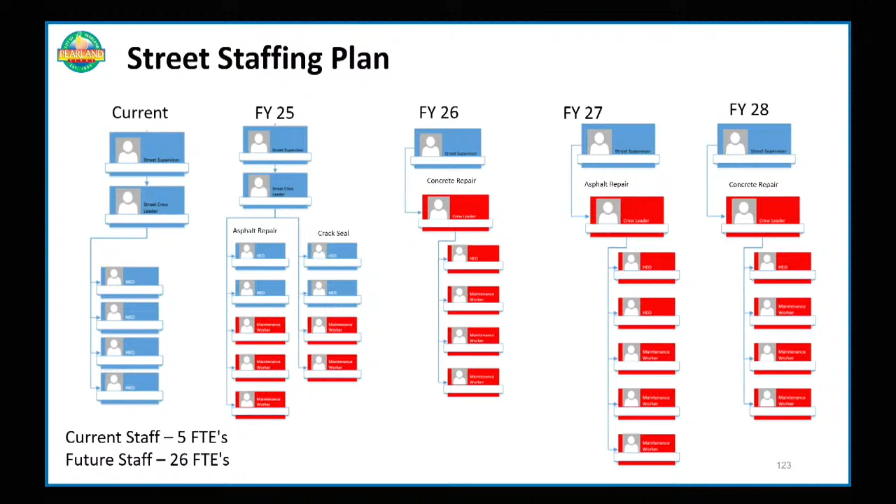And at this time, I'll turn it over to Josh Lee to touch on our communication plan moving forward.

So as far as communications of streets repair and maintenance specifically, we're going to follow a similar approach to what we did with the drainage maintenance crew, where we've seen a lot of success in elevating the base level of education of what it is that we're doing, the process, the expectations for residents, how to report things, and who the team members are. We'll also use our owned assets like our website and social media platforms to inform residents, the same way we've done with the drainage maintenance crew, showing what we're doing, where we're going to be, where we're going, and having all the evergreen information in one central location.

We already have existing platforms to alert residents. So if there are significant impacts from street works that cause traffic delays or prolonged closures, we have a group through our Everbridge platform where we push notifications, and we also put those on the Pearland Police Department's Twitter account. So we have multiple locations where residents will have access to significant traffic alert information, and then we'll drive back to the website and social media platforms for educational and informational content.

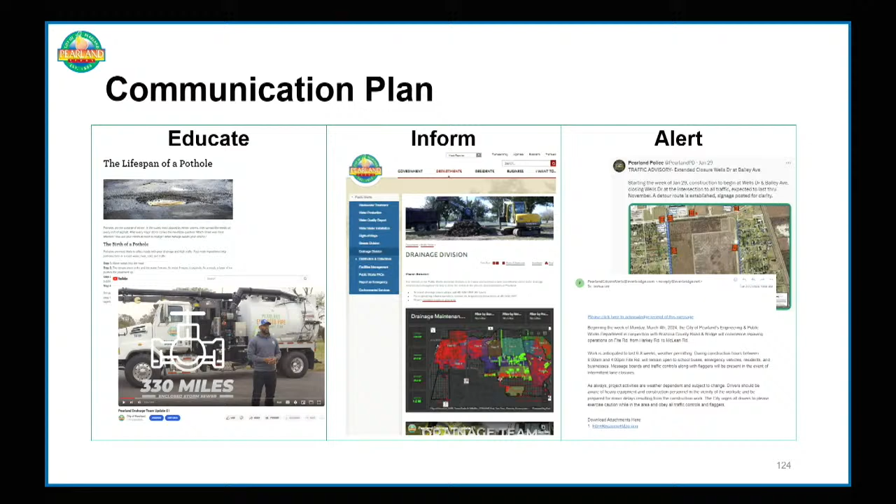Similar to the approach we use for pavement maintenance, we intend to leverage the data to maintain the city's sidewalk network. With the assistance of the GIS division, the EPW team will utilize a dashboard to evaluate sidewalk service requests, prioritize work orders, and deploy resources accordingly.

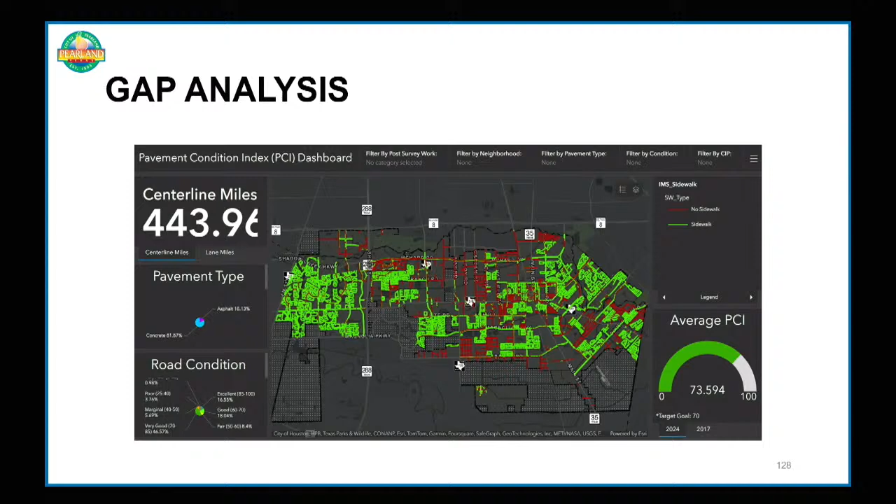As part of the latest bond approval, there's a 4-year allocation of $15 million to address sidewalks and sidewalk gaps. The approved FY24 capital improvement program budget includes $2 million to rehabilitate old and construct new sidewalks. To initiate the program, we intend to mimic the contract currently utilized by the Streets Division to address outstanding work orders and service requests, as well as mitigate gaps adjacent to work areas. To help facilitate the program, we anticipate procuring outside services for day-to-day construction management and inspections. Future work plans will be developed in subsequent years based on similar criteria.

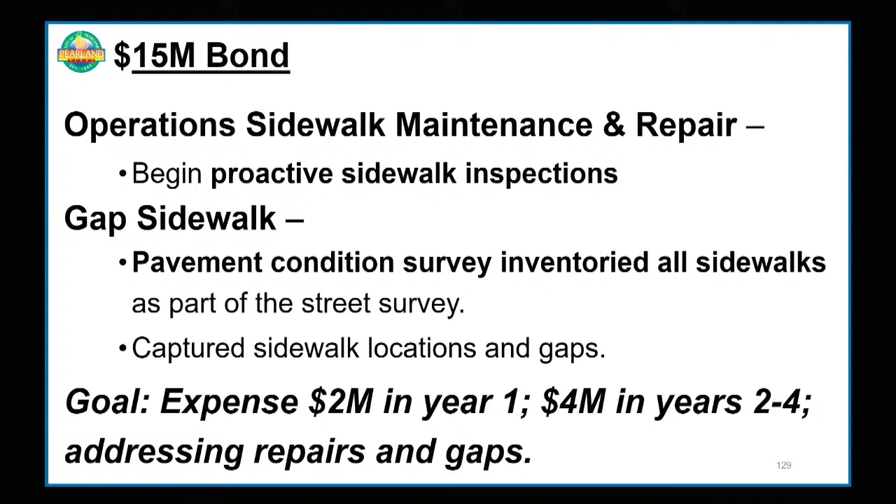This completes our presentation for the streets portion as well as our CIP update. Trent, I'll turn it back to you for any questions we may get.

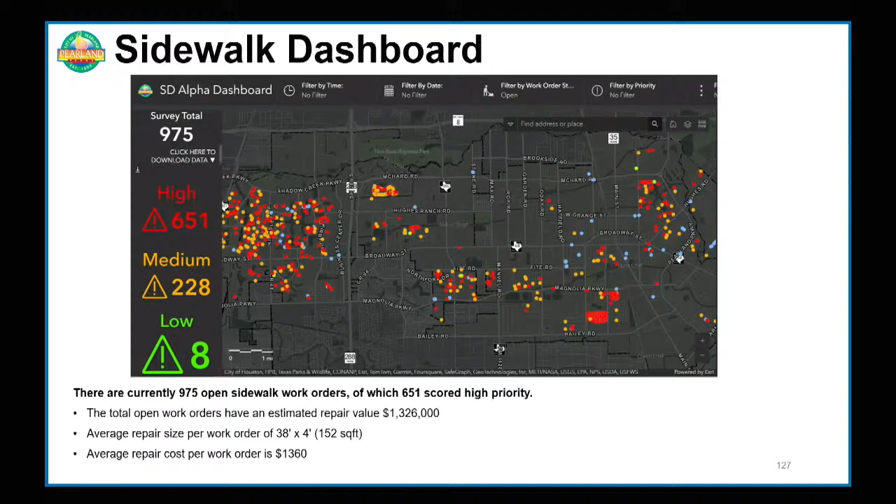If you go all the way back to slide 48, the traffic calming, and I sent Mr. Epperson an email earlier, the Sleepy Hollow cut through, I know that's bad right now. In terms of doing the study, we've still got Dixie Farm and 518 under construction, and now you've got the bridge out at Green Tee. So when I saw this and the timing of it, it made me scratch my head a little bit - are we going to get accurate results for that cut through traffic?

Thank you for the question. Yes, we have some data that we took before the Dixie Farm and the bridge closure. However, yes, you're right, there's some cut through traffic happening due to those 2 projects. So we're trying to see if we can compare the data we take right now to what we had previously, before those 2 projects, so we can gauge how much it will be. And the intersection at Dixie Farm and 518, we're just lacking some traffic signal heads that have to be installed. I don't have a date on the schedule for that, but that's all that intersection lacks. So I think we can hopefully have that up and running fairly soon, and then proceed with it, because if we wait until the bridge project's over, we'll be waiting at least 9 months, maybe longer. And I think we need to evaluate this, and this is probably less affected by that than some other areas.

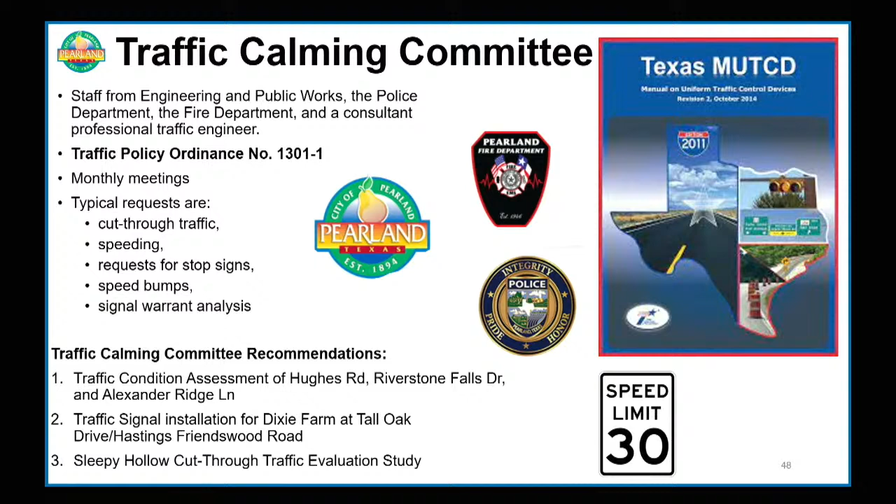And if you could also go to slide 104, the graph shows a big jump in sidewalks, miles of sidewalks, flat line, and then a big jump from 16 to 19. Is that just how the data was captured? Yes, sir, Member Carbone. We believe it was part of how it was captured and the resourcing at different times of our GIS team, being able to pull in different data sets to get you to the 617 that we're confident in today.

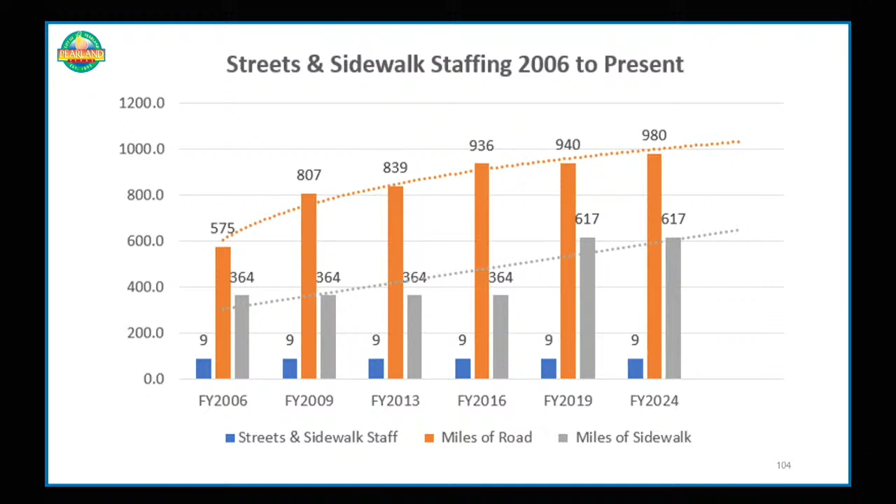Okay, all right. The 364, 06, 09, 13, and 16, it's all the same number. Same thing, yeah, thank you. Mayor Pro Tem? Yes, thank you, Mayor. Eric, can we pull up slide 121?

So on our pothole program, how's that rotating? Is it each day you're going through one section, or are you attending a week, what timeline? Each day we're focusing on one section, matching the success of some of our other program-based approaches. This allows staff to stay in a dedicated area, resolve the known work orders, and work within the next couple of months to a point where we believe we'll be proactively canvassing each area and filling potholes before they're reported. But yes, one zone a day.

So each week, each section's getting one day? Yes, sir. All right, thank you. Good deal. We are piloting that, and we'll continue to monitor and measure success, and expand or collapse the program as we need to make sure we're successful. Okay, so we're in a learning curve right now.

All right, any other questions, comments? Mr. Hernandez? Thank you, Mayor. I just want to know who's in charge of advancing the slides tonight, going back and forth. You should be in charge of it always. This is the fastest I've ever seen it switch. So, Trent, if you can please bestow upon her... her skills. Thank you. Who put their hand up? Priya? Priya's got a lot of other big challenges we want her time focused on, but we appreciate the efforts tonight for sure. Amazing. You mentioned the number, and it's there. Yeah.

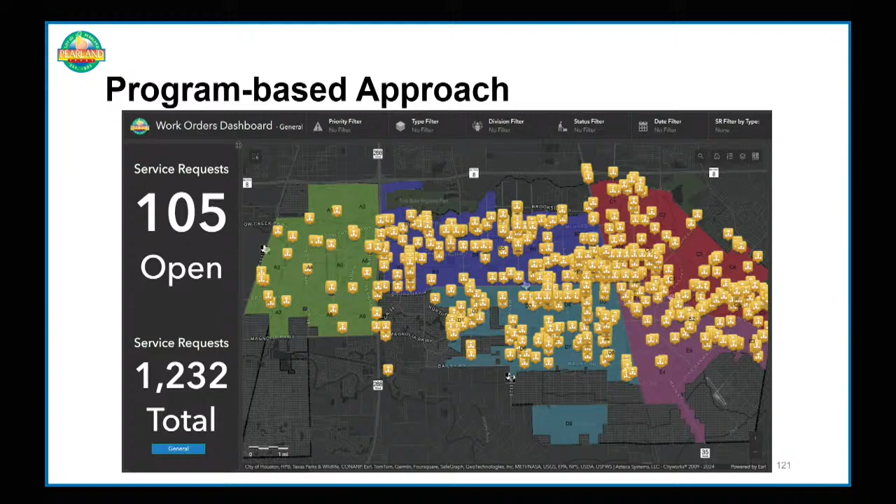So, Eric, Lorenzo, Trent, on the whole PCI and pavement maintenance discussion you put in here, if we spend 1.1, if we spend 3, if we spend 5, what are you looking for tonight in direction from council? So maybe we could jump to slide 114, and appreciate the question, Mayor. I think it's really important, and challenge Priya, can you jump to the one that shows the asphalt versus the concrete?

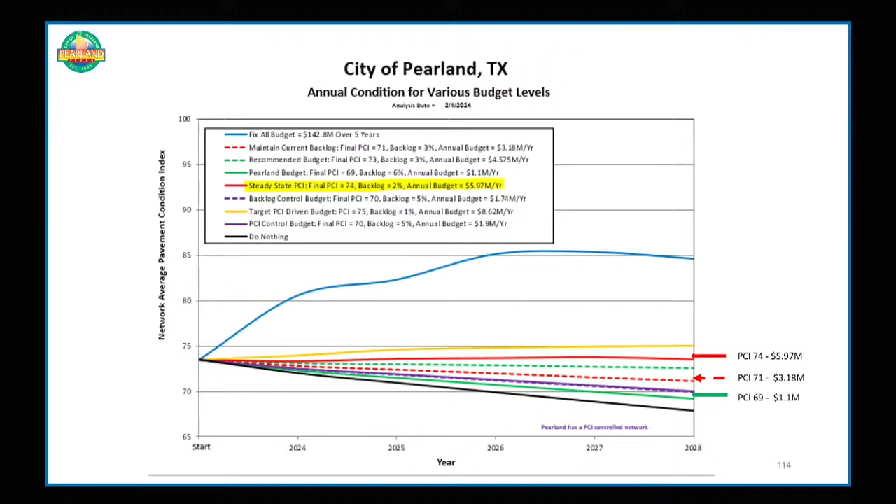I don't know what slide it is. I think this shows what we have to do to keep that steady state annually, and where we've been, and what that'll do. This is a big picture analysis of what we've seen. It's a different one, I believe. No, this is good, because this is a policy question. And so what we really are seeing is that it's the asphalt streets that have degraded significantly since our last couple of surveys.

So we had the discussion in February about some funds potentially available that we could go after for some additional asphalt work this year. I think that's one of the questions tonight: do we allocate more out of those resources, and what's the additional amount the council's willing to allocate this year? And then as we move into our budget cycle, we'll look at a plan of how we increase that operating budget year over year until we get it to a point where we have a sustainable program.

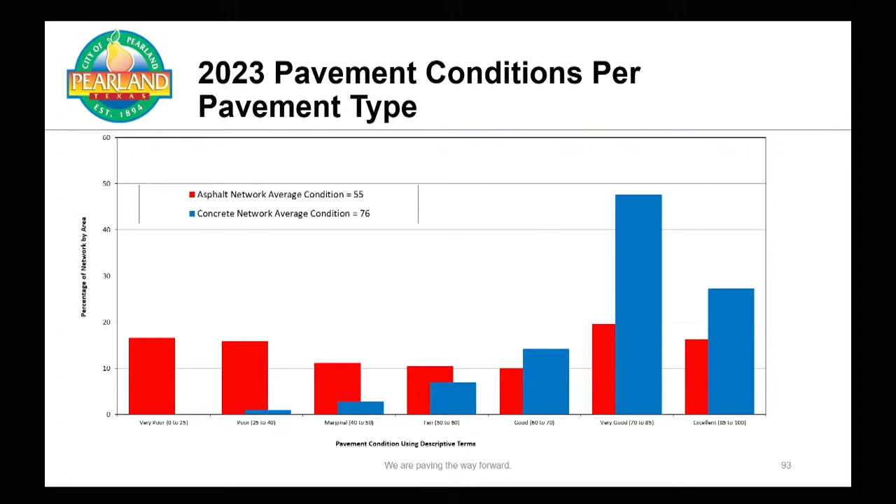Yeah, and with that, if I remember the discussion back in February, there is a limit on what we can add to the existing management of projects, so remind council what that limit is. I think the teams, if we contract out a lot of asphalt work over the next 9 months, we can take just about anything thrown at them. So I think we had identified up to around 5. Victor here. So yeah, we had identified around $5 million or so.

The funds we looked at for putting into the asphalt street program, we'd identified up to about $4.5-5 million. I think we could go to that extent or anywhere in between, but it's obvious we need to infuse the street program with additional dollars and make that sustainable moving forward.

I wanted to comment on the plan to, much like we did with the drainage team, ramp up the street maintenance team. That's an ideal plan of how we can do that over the short order. We're going to look to do that as quickly as our overall priorities allow over the next few years. But that doesn't mean we're going to be out there doing all the paving and all the work. It really just means we're able to do the preventative maintenance and some of the larger work that we can't do now, so we can be reactive and proactive.

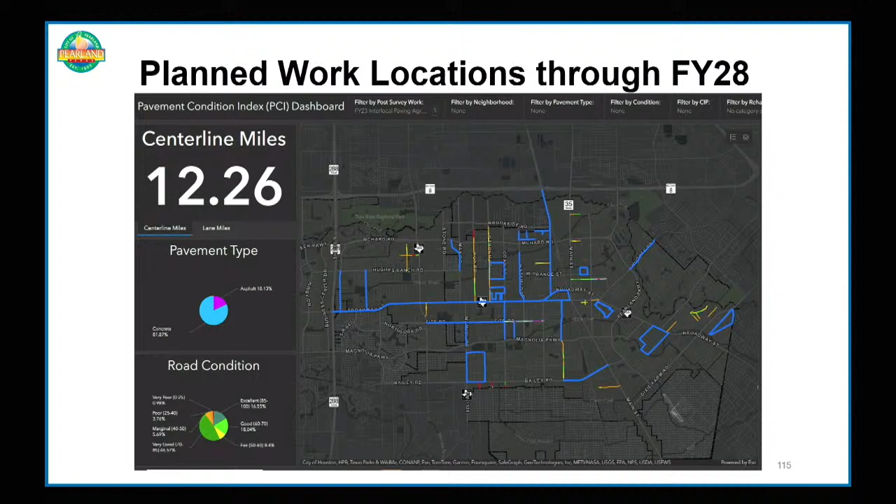Got it. So I think you see Veterans on this list because we have the Veterans Drainage Project, which puts the box culverts in from basically Walnut to Mary's Creek. And part of that, we included a rebuild of the road when we get done with that drainage project. So that's why you see that one in blue. And so basically everything in blue is either captured by the state or the CIP. Is that correct? Right.

And then I think we're facing another rough summer, at least that's what I'm hearing. The prediction is we're having a potential drought again this summer. That means our asphalt streets are just going to take that much bigger hit. And I don't know what we do to gear up for that other than we live through it.

Yeah, live through it. And I think, for the long term, when we start doing some of these preventative maintenance things - when you've got a robust joint and crack sealing program, a robust chip seal or overlay program - a lot of these roads, when they fall apart, it's because you have the drought, you have the shrink and swell, you get cracks down into the subgrade, and then when it does start raining, that's when your subgrade falls apart. If you've got a robust joint and crack sealing or overlay program, you can minimize how much of the subgrade's getting that moisture down into it when it does start raining, and reduce some of the effects of that.